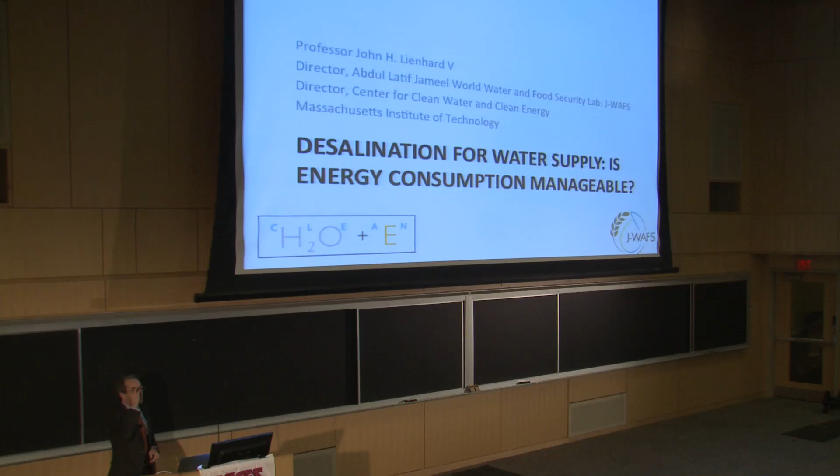I'm going to talk today about desalination, its value, its pros and cons. I'm going to focus principally on energy consumption issues in desalination. As Eric mentioned, I'm from the mechanical engineering department at MIT. Much of my work is around energy, thermodynamic analysis, and related things, and transport processes, in particular, have a great deal to do with how desalination systems function.

So I want to show a few illustrations just to get going. This is a picture I took when I was in Chile, in the Atacama Desert north of Copiapó. This is the world's driest desert. It receives an average of about 3 millimeters of rain annually. Some parts of this desert have never recorded any precipitation. And so the water that people have there, they're receiving primarily from rivers that run down from the Andes, which are about 100 kilometers inland.

The city of Copiapó had one such river. It's in a mining area, population of around 150,000 people. But the desert here is not simply an area where people are mining, particularly up in the foothills of the Andes. It's also an area where people are growing grapes for export. It turns out that if you irrigate under these conditions, you get great big grapes that can be sent to Asia and sell at sort of $1 a piece price point.

So between that and the demand for copper in China, the demand for water from these rivers has risen quite steeply. The river in Copiapó has been dry for 15 years. And as a result, they've had to look for other solutions for water supply.

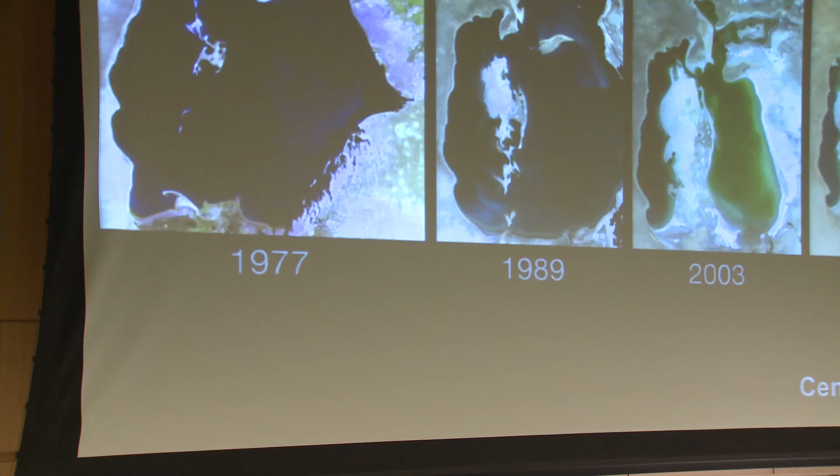This is a by now famous picture. This was the world's 4th largest freshwater lake, the Aral Sea. It is the size of Lake Erie plus Lake Ontario, to give you a sense of scale. Like those lakes, it had cities around it. It had a fishing economy. The 2 rivers that fed this lake were diverted for agriculture in Uzbekistan, and over a period of a couple of decades, the lake dried up. And as it dried up, it took the cities down with it. It eliminated the fishing economy, and the environment there has become quite hot and dusty without the moderating influence of the lake.

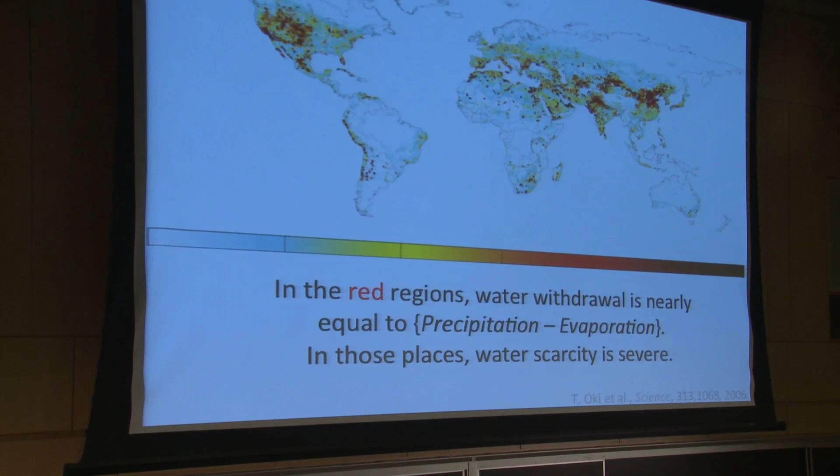And so a completely different setting, a completely different problem. This chart shows in red areas where the human withdrawal of water is essentially equal to the net precipitation over land. The significance of that number is that net precipitation over land is our renewable supply of water. That's what we get renewably. You can pump out an aquifer and drain it, but it doesn't come back unless you're taking it out only at a rate at which it can recharge. So it's very significant when we start to use as much as we're getting renewably, because it means water scarcity ensues in a significant way.

What's important about this chart, apart from the fact that water scarcity is very widespread, is that it's very contextual. You have rich countries, you have poor countries, part of a country, not part of a country. You have regions by the coast, regions inland, regions that are generally fairly arid, perhaps in the Gulf, regions like Florida which are generally pretty wet. In every case, it's a different challenge and a different set of problems.

What's driving all of this, and what's making it worse, and why there is so much concern about water scarcity, is the rapid rise in human population. We are on track to have 5 times as many people in 2050 as we had in 1927. Those additional 8 billion people have to be supplied by the same renewable source of water that we had in 1927. That's not really a dial you can turn up.

The rain falls, and so this is really the major driver behind water scarcity: human population growth. Rising standards of living affect this as well - I'll show you some numbers on that later this evening. And also, of course, the problem of climate change in the background: what is it going to do to the frequency and severity of droughts, to our ability to store rainwater if it's all falling at a single point in a heavy storm, and so on.

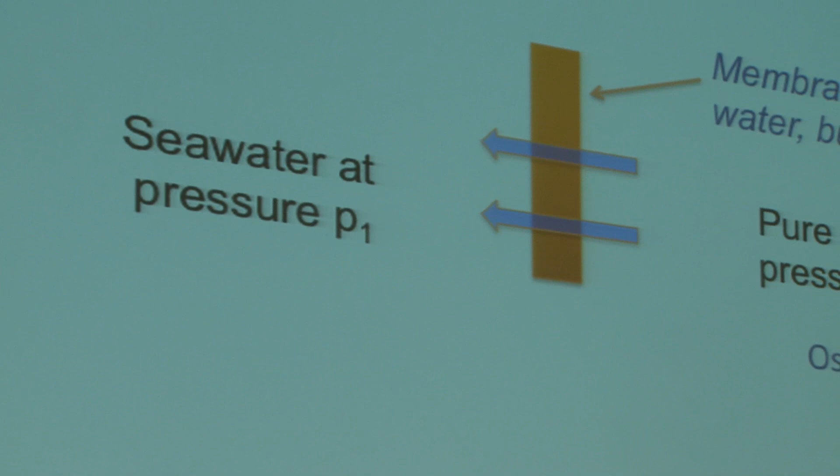So I'm going to recap some things that you've certainly seen from time to time, just to get some terminology out. I want to say what I mean by osmosis and what I mean by reverse osmosis. This picture shows in orange a membrane that water can pass through but salt cannot. You can produce a membrane like that by having appropriate charge groups on the surface. Something called Donnan exclusion will prevent ions of one charge from entering, and that in turn, for electroneutrality of the solution, prevents ions of the other charge from entering.

If you have a case where you've got saline water on one side of this membrane and pure water on the other side, only the water can be transported. There is a tendency for water to move from the pure side to the saline side in a drive toward equilibrium. So the drive toward chemical equilibrium then causes the water flow.

This tendency can be characterized by what we call osmotic pressure. There is effectively a pressure for water flow, which I'll call pi, and I'll refer to from time to time this evening. Pi, the osmotic pressure, is essentially proportional to the salinity. For seawater, the osmotic pressure is almost 30 atmospheres relative to fresh water, so you have a fairly significant driving tendency.

On the other hand, if you come back to this system and you apply a hydraulic pressure on the seawater side, you can reverse the flow and actually drive water through to the pure water side. The process of reverse osmosis is one in which you apply pressure sufficient to overcome the osmotic pressure corresponding to the water salinity - at least 30 bar in the case of seawater - and you force fresh water out of the seawater through the membrane.

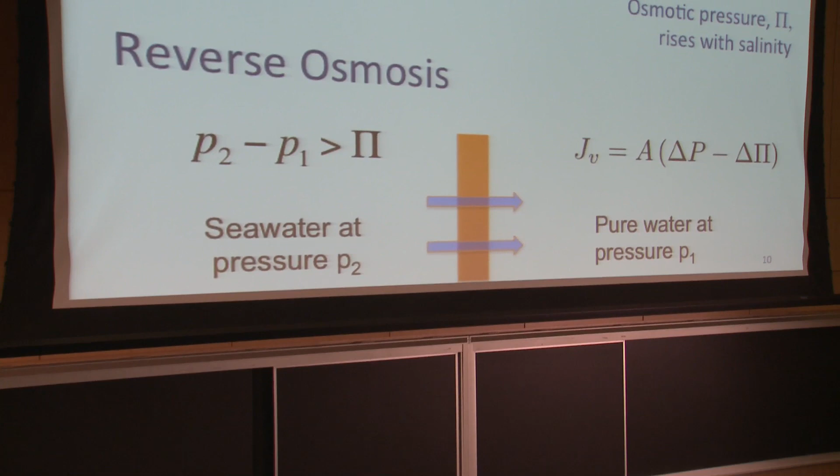The flux of water, say cubic meters per square meter of membrane area, is the difference between the hydraulic pressure and the osmotic pressure of the two streams, and the constant of proportionality is something called the permeability of the membrane, which I'll talk about a little bit here and there.

So this brings me back to Copiapó. Copiapó did not have surface water, but they did have groundwater - brackish groundwater at a salinity of about 3,000 parts per million. So Copiapó began pumping up groundwater and desalinating it by reverse osmosis. This is, in fact, one of the two plants they have.

The groundwater is brought in. There's some pre-treatment initially, then it comes to these high-pressure pumps. The pumps run at approximately 9 bar, 9 atmospheres, and the pressurized water is then taken into these pressure vessels where it's passed through membranes.

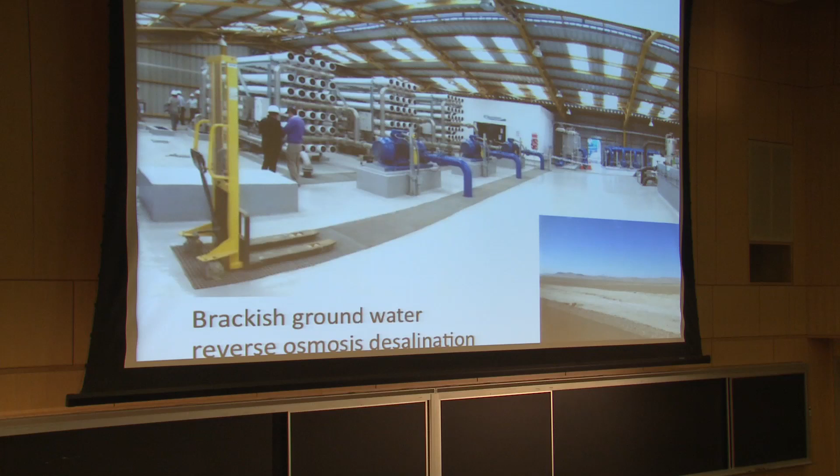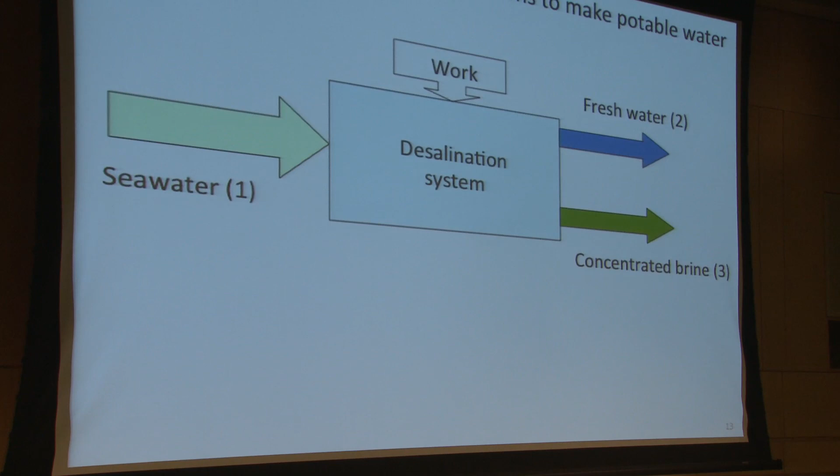Now, I said energy when I started, and I want to start by saying what the limits of energy requirements are for desalination. As a thermodynamicist, I look at that RO plant using a control volume. I look at saline water coming in one side, perhaps seawater, a stream of fresh water coming out, and then a concentrated brine. This carries all the salts that I took out of the fresh water, and in a typical case, it contains about half of the incoming water volume. The separation of these requires work in a thermodynamic sense, and that work is then provided by the desalination system to perform the separation. What is the work? The work is essentially the pumping work of the pumps that drive the water, or if you like, it's the electrical work that turns the motor.

And this work has a distinct limit. You can apply the first and second laws to that control volume. If you assume the system has no losses, the minimum energy required to recover about half the water from seawater is 1 kilowatt hour of electricity per cubic meter, per 1,000 liters of water. A cubic meter is about 265 gallons for reference. That's the best you can ever do.

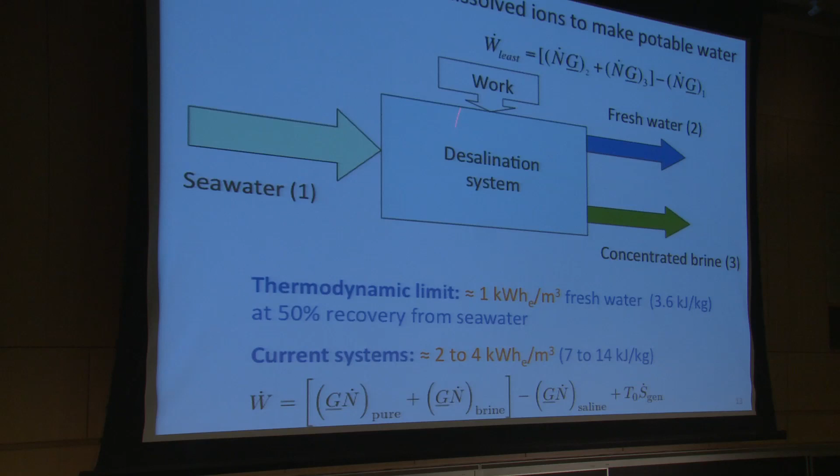Today's state-of-the-art systems are running between 2 and 4 kilowatt hours per cubic meter, and the reason they differ is because of inefficiency. Again, as a thermodynamics person, I think of the inefficiency as a source of entropy production. The system is not reversible as a result of various losses, losses in the pump, losses through the membranes, losses to hydraulic friction, and so forth. That difference is what you would like to reduce in order to drive the working system toward its thermodynamic limit of performance.

Now, every now and then, in fact quite frequently, maybe once a year, somebody will invent a new membrane or a new process. They'll get very excited and make a statement like this: the new membrane is going to reduce the energy requirement by a factor of 100. Well, from what I've just shown you, the current state of the art is within a factor of 2 or 3 of the best you'll ever do. So you know, without evaluating the claim, that it's incorrect. What's happened is that somebody has looked at a membrane with 100 times the permeability, and presumed that means 100 times less energy. But the systems are a little more subtle than that.

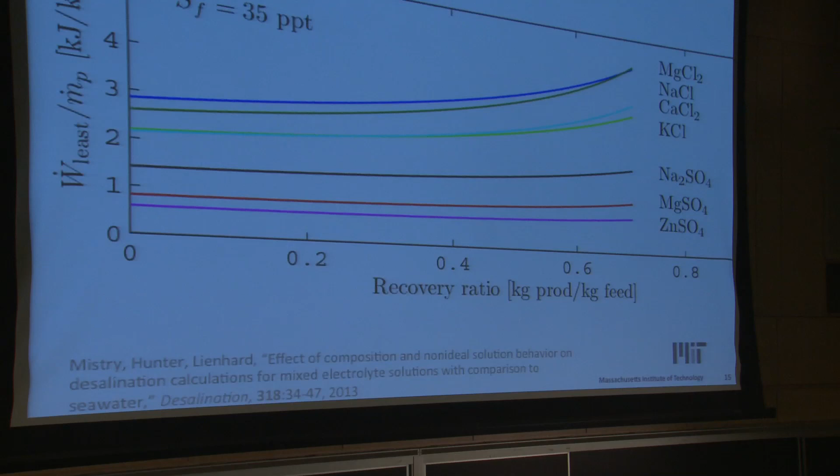Now, the numbers I showed you for the minimum work requirements were for saline water with the composition of seawater and its total dissolved salts. If I used a different composition, say zinc sulfate at the same mass concentration instead of mostly sodium chloride as in seawater, I would need much less energy. At a glance that may seem obvious, but it's very important as you start to think about the variety of waters you might want to desalinate.

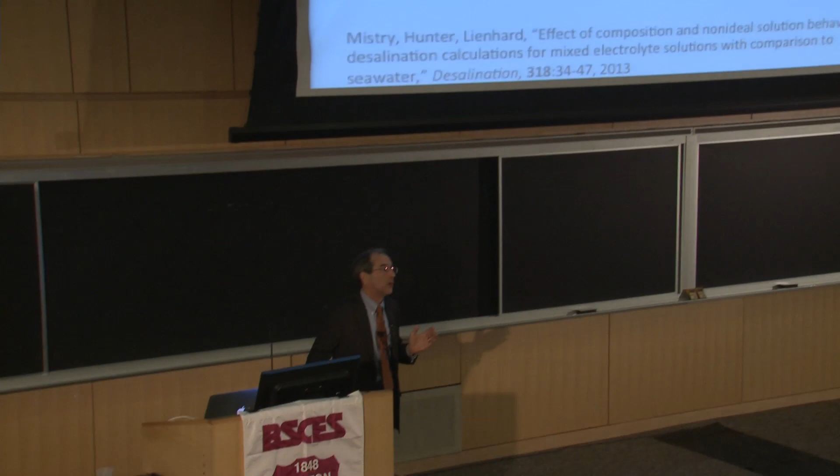It turns out that seawater around the world has more or less the same proportions of dissolved ions. It can be saltier or less salty depending on rates of evaporation and freshwater inflow from land, but in general you have about 80% sodium chloride and similar proportions of calcium, sulfate, carbonate, and some other common ions. If you're dealing with groundwater, the compositions and proportions are different, so you have to be careful in just assuming it's diluted seawater.

If you're dealing with water from various industrial processes, perhaps from oil and gas production, you again have very different compositions. I want to mention this topic in particular because there's been so much attention and concern about shale gas production, unconventional oil and gas, and in particular the water used in that process. Both the water that gets pumped in and received back for hydraulic fracturing, but also the water that's steadily produced by these wells over a period of years. The so-called flowback water comes to the surface within a month or two of the fracking operation, and you get perhaps a third of what you put down back.

As the well continues to run, water continues to come up with the oil or gas. That water has been underground for a very long time. It's come to chemical equilibrium, more or less, with whatever rock formation it was pulled from, and so it reflects the composition of the rocks it's been sitting in. It's also generally at very high salinity.

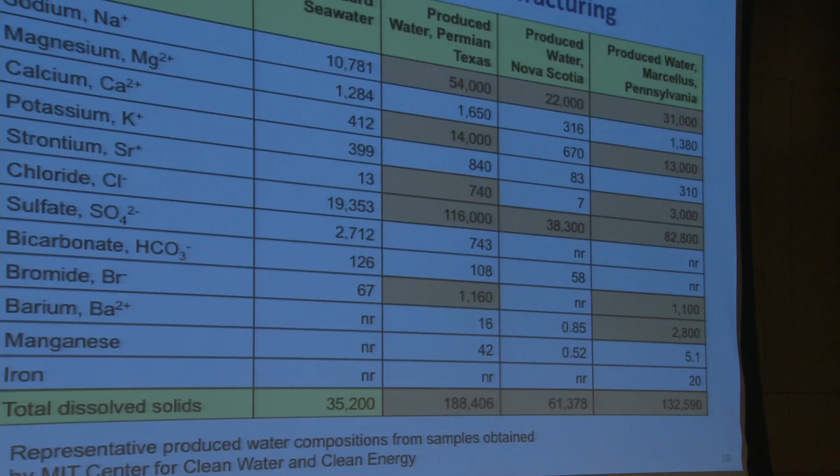These are some typical samples. This is the composition of standard seawater at about 35,000 parts salt per million. You can see the dominant ions in seawater are things like sodium, chloride, calcium, and so forth. If I look at produced water, a typical sample from the Permian Basin in Texas, you'll notice the proportions are different—you have things like strontium and barium at relatively high concentrations.

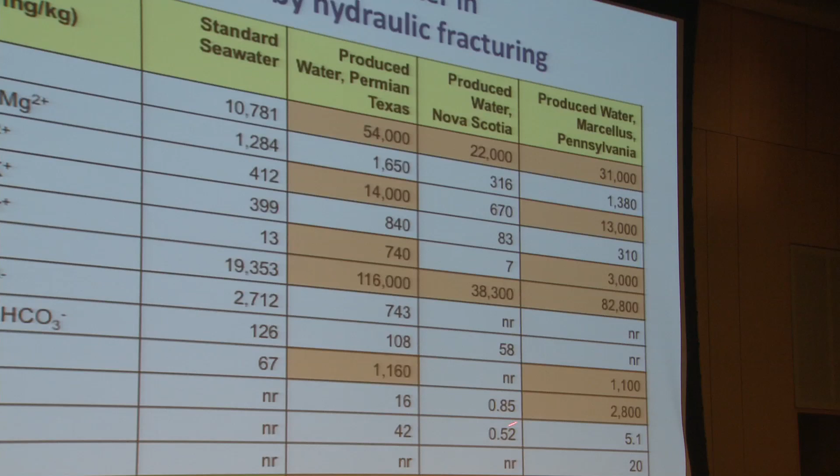You'll notice that the total salinity of this water is about 6 times that of seawater—much saltier water. If I look at similar water from fracking in Nova Scotia, it's only twice the salinity of seawater, and it's mostly sodium chloride—maybe not surprising given where you're located. And if I go to the Marcellus shales in Pennsylvania, I get another salinity. Again, I might see a lot of barium in the water, perhaps a lot of strontium. These variations in composition are quite important if you start thinking about desalinating that water and cleaning it up.

What are you going to do about it? For example, if I go to these calculations I showed you before of the least work of separation for such water, the curve on the bottom for about 3.5% sodium chloride is very similar to the seawater curve. You can see that as the percentage of water I recover goes up, the amount of work required goes up. Typically for seawater reverse osmosis, you're going to stop at about 50% recovery.

But what's more interesting here is that when I go to these other formations and look at produced water—Permian Basin in Texas—for that water, you're looking at a least work that's almost 8 times as much as the work required to desalinate seawater. So the composition right away sets a baseline that says you've got some challenges.

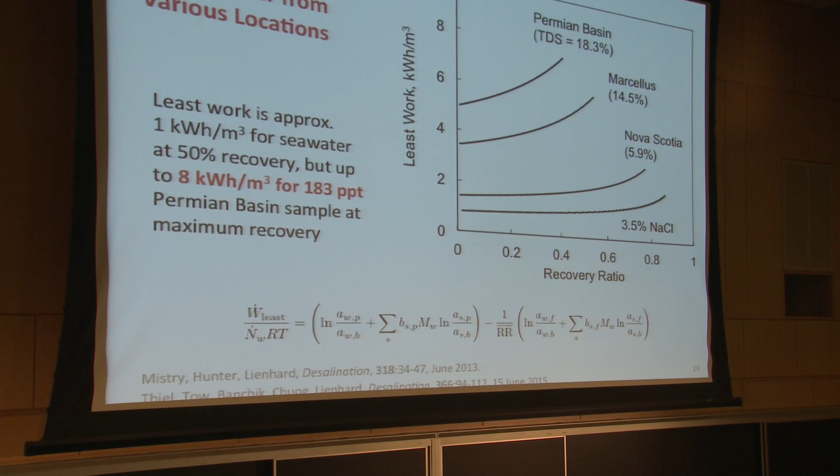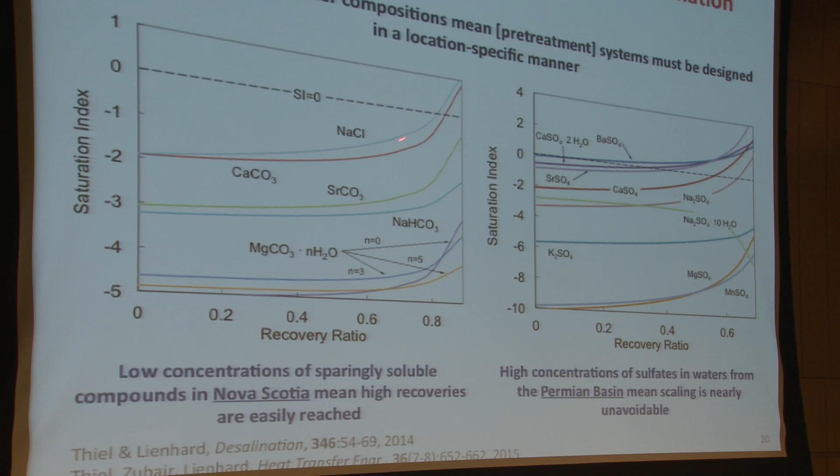You have some other challenges as well, because as you start to remove water from seawater, from produced water, from any of these things, you'll hit a point at which you reach the solubility limits for one ion or another. For the waters from Nova Scotia, you don't have a lot of stuff that's insoluble. In fact, the first thing that really starts to precipitate is sodium chloride, which is often actually relatively easy to clean out of your equipment if you do have fouling.

On the other hand, if you look at the water from Texas, almost immediately you're coming out near saturation with barite. You've got strontium sulfate as well, you've got calcium sulfate—these things are coming out right away. What that tells you is that before you can even think about desalinating that water, you've got to do some type of pretreatment to get rid of the strontium, get rid of the barium, remove the sulfates. It's typically done by chemical softening of some sort, and then you can go on and desalinate whatever remains.

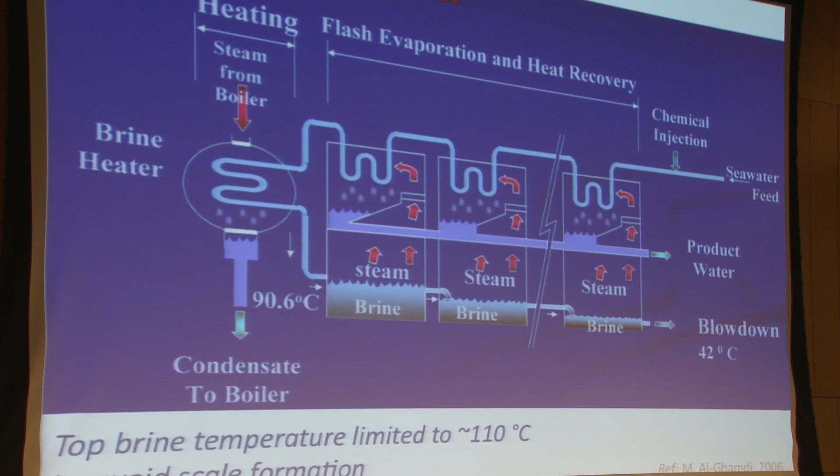I mentioned membrane processes. I want to say some things about thermal processes. Distillation is, after all, the oldest of the desalination technologies—it goes back to antiquity. A modern distillation plant is much more thermally efficient than simply boiling water and condensing the vapor would be, because when you boil water and condense the vapor, you're giving up all of the energy you used to vaporize that water in the condensation step. Water requires something like 2.2 megajoules per kilogram per liter of water to vaporize—a lot of energy when you're doing it at large scale.

So a well-designed thermal desalination process will attempt to capture the latent heat as vapor is condensed and reuse that energy to vaporize more water. When a system is designed well, the amount of energy you put in is about 1/10 the amount of energy it would have taken to boil and condense that water. We call that ratio the gained output ratio, and a design goal is to make the gained output ratio large.

Now in this case, you've got seawater coming in. It's cold, acting as a coolant in a condenser, condensing some vapor. It's doing this through multiple stages, perhaps 20 or 30 of them, and finally it will leave the condensation path at a temperature of perhaps 70 degrees C. You'll top heat it with steam from an adjacent power plant, and then it will come back at 90 C, and you'll start to depressurize it.

You'll drop the pressure in each stage 5 to 10 kPa, and every time you do that, you vaporize a few percent of the seawater. This vapor is formed by going through each of these stages. The depressurization is accomplished by pulling a vacuum at this end and then having a series of weirs, a hydraulic resistance stage to stage that allows you to get the pressure drop.

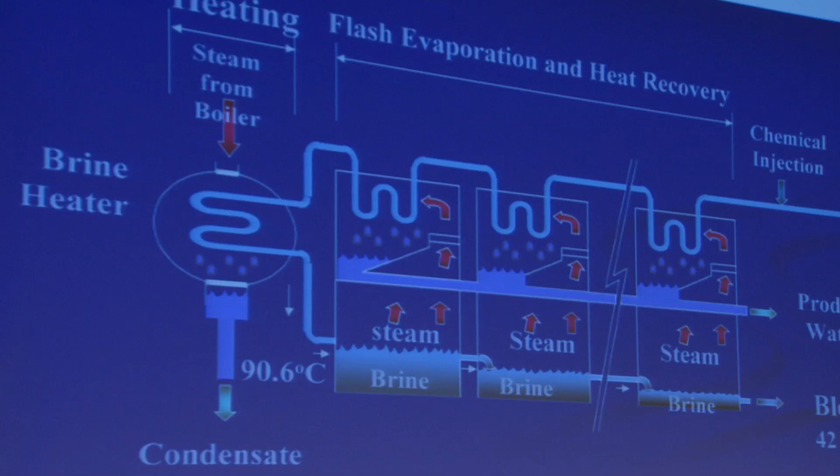The vapor that's formed here condenses and comes out as product water. The whole thing from a thermal engineering perspective is a regenerator, a recuperator. You're recovering the heat you put in to the greatest extent possible, and then you're getting the purified water on the outlet.

These systems would operate all the more efficiently if they had a really high temperature on the top side. But you're limited on the high end by scale formation. Above 100 or 110 C, you very rapidly begin to precipitate calcium sulfate, which forms hard scale in your equipment. It's not economical to control or remove, so people just don't run beyond that.

If you could find a way to do it that was economic, you could make these systems much more efficient. You could probably make a lot of money.

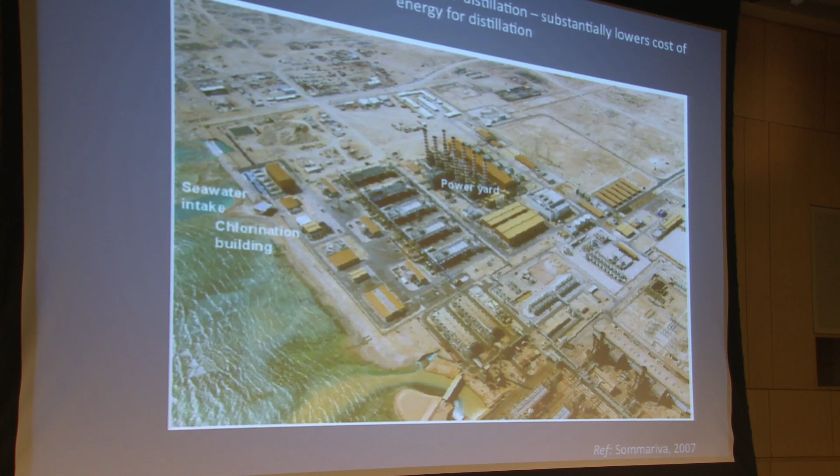Water is taken into the power plant. It's used as coolant in the condensers. Some of it is also used in the flashing process. Depending on how this system is designed, the water that leaves the plant, the brine leaving, might be blended with some of the coolant from the condensers to dilute it before it hits the ocean.

Systems like this also have a limited performance. To think about that, I simply think about heat at a high temperature going to a low temperature. Remember something called the Carnot cycle from thermodynamics? The amount of work you can produce from a Carnot cycle is related to the amount of heat transferred and the temperature differences. A straightforward calculation will tell you the least amount of heat required to desalinate.

Now here I want to be very careful. Heat and work are not the same so far as a thermodynamicist is concerned. For example, to make work, to make electrical power, you use a lot of heat. But you can only convert about half of that heat into electrical power. The rest has to be dumped under the principles of the second law. And so you don't want to add heat to work.

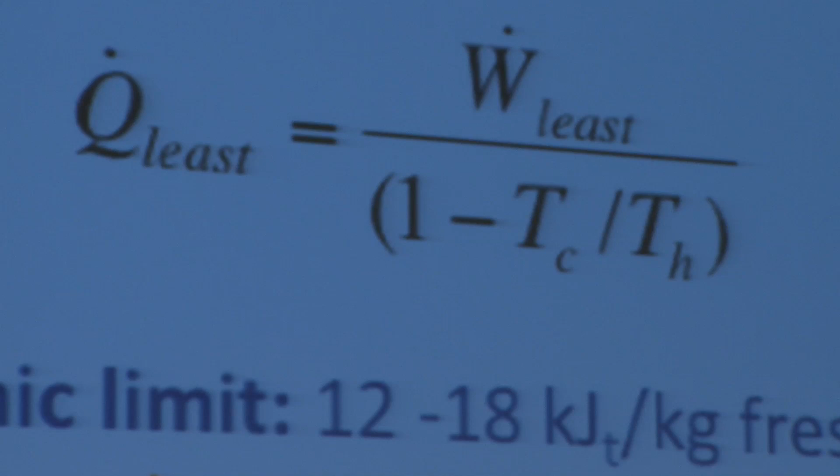I'm going to give you the performance here in units different than I used before. These are kilojoules. The thermodynamic limit of performance is about 15 kilojoules per kilogram of water produced. Now, a real system, such as the one I showed you in the picture before, requires about 20 times that much thermal energy. It's a long way from the reversible case, very long way.

There are a number of reasons for this. One is that the top temperature tends to be very low. Another is that to get reversible performance, or anything like it, I would need very large heat transfer surfaces. That means very large condensers with very large amounts of expensive copper-nickel alloy piping. It would not be economical to build this system strictly for energetic performance.

Like all desalination systems, these things are designed to optimize the cost of water as opposed to the energy consumption. And the capex for a system like this can get to be quite high.

Now, what I can do to make a comparison to the mechanical system is I could say, well, I got this heat at a certain temperature. I could have left it in the power plant. I could have generated more electricity with another turbine, a condensing turbine. How much electricity could I have made? Well, I could have made something like, say, 14 kilowatt hours of electricity. That's still a lot more than the state of the art for the reverse osmosis systems.

On top of that, the system that I showed you back here is circulating enormous amounts of water. The electrical work to pump that water is typically 3 to 4 kilowatt hours of electricity all by itself, just for the pumps, which is to say it's already just as much as the reverse osmosis process.

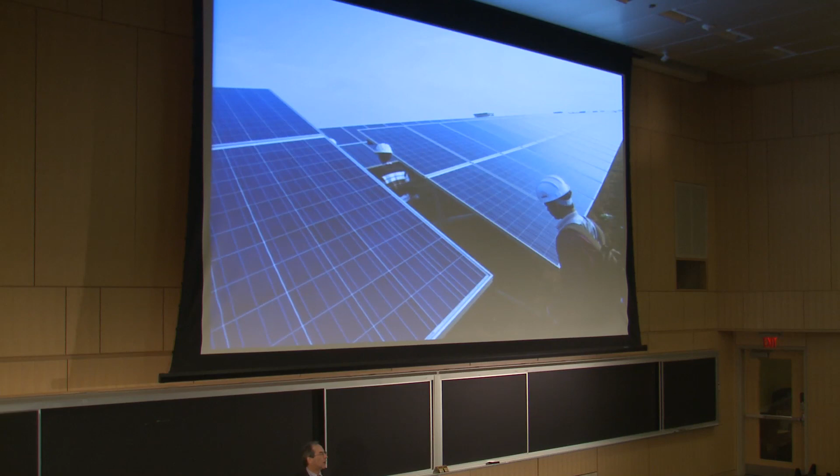For that reason, most interest in solar-driven desalination is based on photovoltaics, which directly produce electrical work from solar energy, and which have become cheaper and cheaper as production volumes have come up. So almost any time you see somebody trying to do solar-driven desalination, off-grid desalination, the driving energy source is going to be a solar panel, and that's really very much the direction things have gone.

Groundwater, of course, is the other place we might look at desalination. There's a lot of water around that is brackish, for one reason or another.

So people are interested in the question of whether they can pump some of that up and desalinate it and use it for irrigation or even for drinking or for some other purpose. You, of course, also have to ask yourself whether it's recharging at adequate rates. There are a bunch of hydrological questions that go with the use of that resource. But nonetheless, this becomes very interesting in particular contexts.

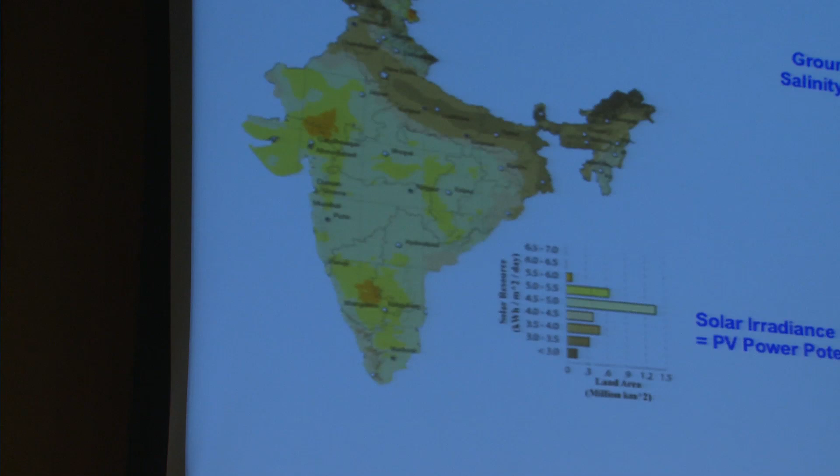Amos and Natasha observed that these regions that have very brackish groundwater also tend to have fairly high solar availability, so a lot of solar incidence. If you've been to Gujarat, it is very dry and very sunny, for example. So their idea is to use solar panels, electrical panels, and a process called electrodialysis to separate ions from brackish groundwater. Electrodialysis has been around a long time.

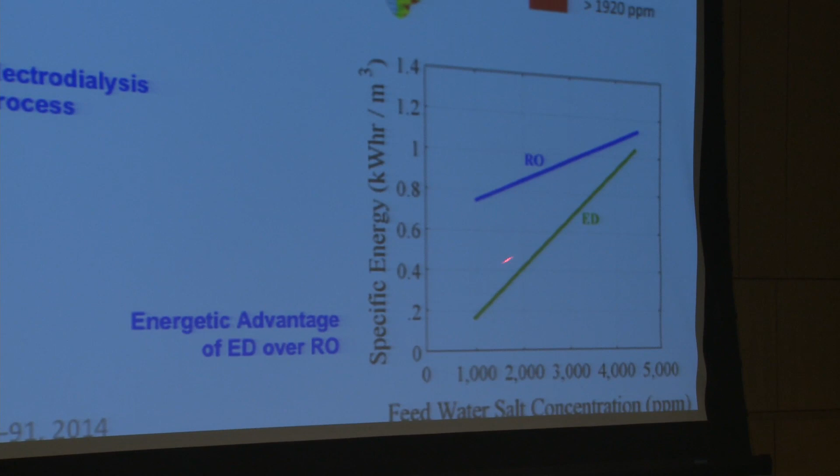It happens that there is a sweet spot for this technology relative to reverse osmosis. The energy required to desalinate by electrodialysis is less than reverse osmosis by a significant amount within a window of 1,000 to about 3,000 ppm, again depending on some design variables. So they're interested in coupling solar panels with ED to go into India and address some of these challenges.

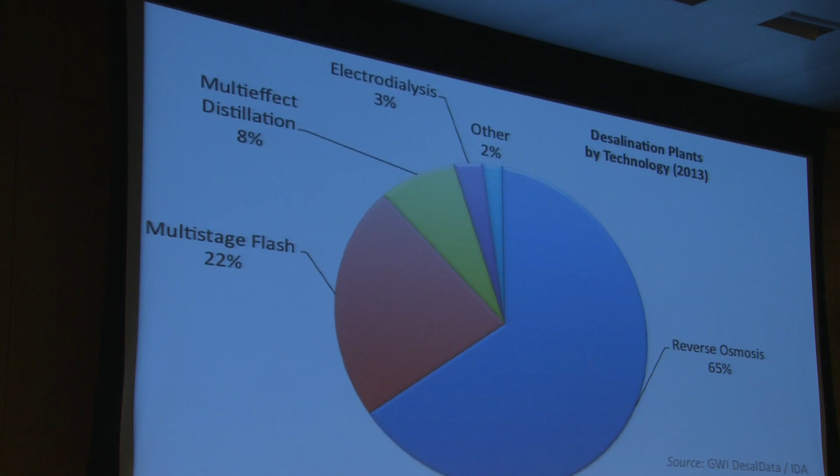So I've given you a range of technologies at this point. This is a map or a pie chart from 2013, data from the Desal database. What you see is that worldwide, most of the installed capacity, about 65%, is reverse osmosis. You have fairly large installations of the flash process I showed you, a related process called multi-effect distillation, just a very little of electrodialysis, and then some other technologies. A total of, actually today, close to 90 million cubic meters per day of water are produced by this means.

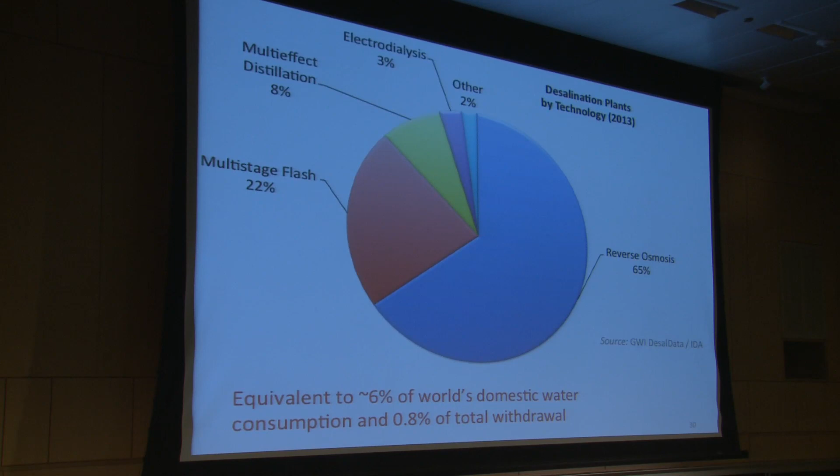As it happens, that's equivalent to about 6% of the world's domestic water consumption. It's not all used that way. Some of it's used for power plants. For example, in Gujarat, the world's largest oil refinery has a distillation plant that provides all of its water.

If you look at the total water withdrawal in the world, it's on the order of 1% and continuing to grow. Now, about 50% of seawater desalination is done with these thermal technologies, which aren't very efficient. You might ask why people are using these. Well, they're great big plants with very long lifetimes and large capital investment. You can retube one of these things and keep running. These plants went online many years ago and will stay online for some time to come. But there are relatively few thermal plants being built now, and even in countries with a lot of thermal plants, typically the Arabian Gulf states, they're building more reverse osmosis plants. That's really the direction things are headed.

The largest installed capacities are in Saudi Arabia, Kuwait, and the United Arab Emirates. As it happens, the United States has a great deal of desalination too, but we're also a very big country so you just don't notice it—it's not a huge fraction of our production. The Spanish have gone heavily that way, the Chinese are moving that way, and of course the Israelis are getting most of their water at this point that way.

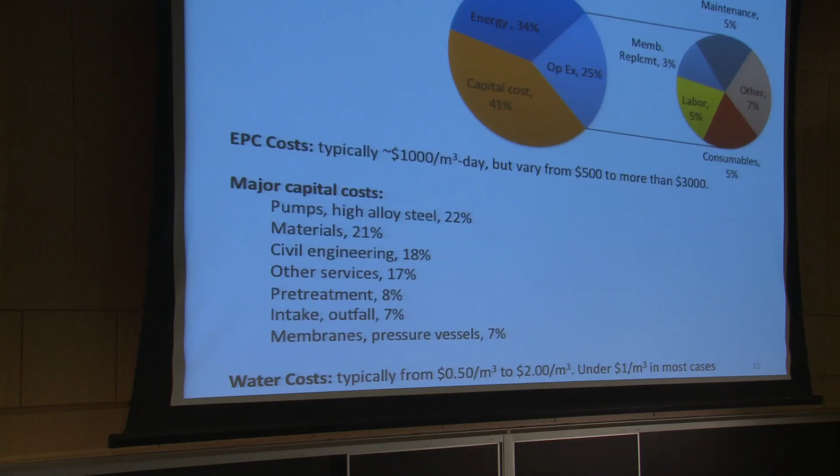You might be wondering what this all costs. Cost is always a big concern around desalination, so I'm giving you some breakdowns here. The pie chart shows the cost of water, roughly dollars per cubic meter. About a third of the cost of water from reverse osmosis is energy, the electricity. About 40% comes from CapEx, and the balance is OpEx divided amongst the categories you can see here.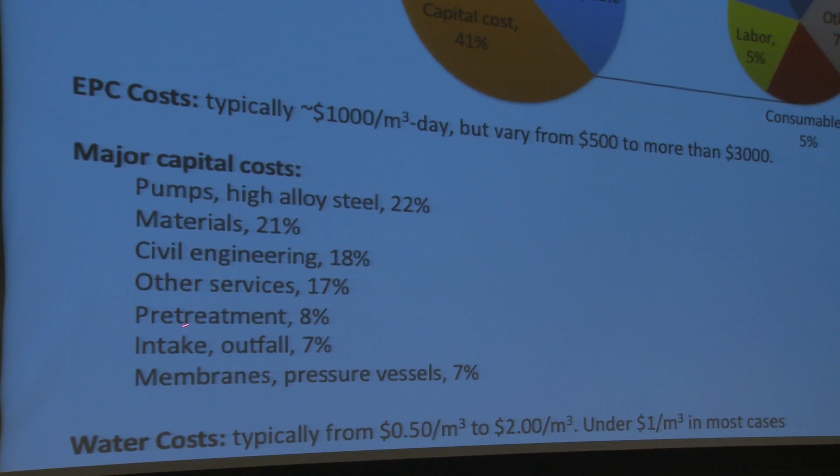If you ask what the EPC cost is—the engineering and construction cost—these are the major drivers. High alloy steel and pumps are almost a quarter of the cost of a typical plant. Other materials, engineering services, legal and other services follow. Finally, pretreatment, intake and outfall for the plant. Surprisingly, down near the bottom are the membranes and pressure vessels. For all the attention given to membranes, they're actually not the most costly part of the plant by a good stretch. This tells you that as you think about engineering these plants to cut cost, you're probably more interested in reducing the amount of high alloy steel or the number of high pressure pumps, as opposed to improving the membranes.

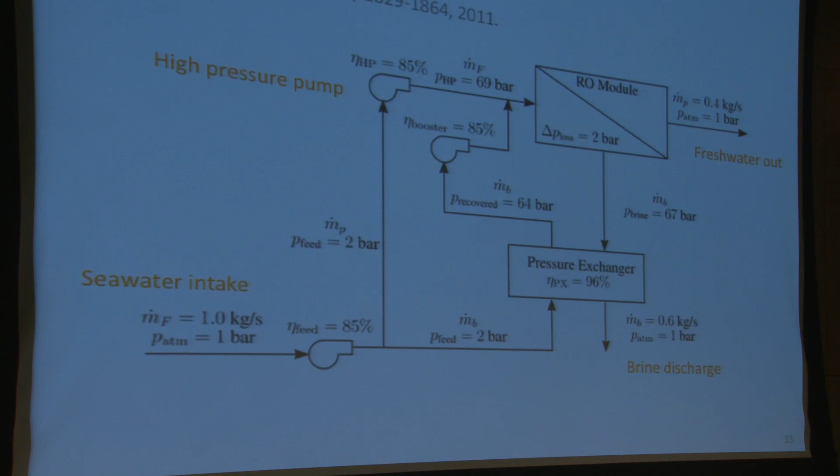So what governs the efficiency? This is a representative flow path of a reverse osmosis plant. The membranes are in this box here, so high pressure seawater enters, goes through the membranes, and comes out as low pressure purified water. High pressure brine leaves over here—it doesn't lose a lot of pressure, maybe a couple of bar against perhaps 70 bar as it goes through the membrane.

So there's a lot of energy in the brine leaving—it might be 60% of the flow. That energy is recovered through something you can think of as a turbocharger pump. The actual devices, the pressure exchangers, are rotary machines—really very clever engineering. They're very efficient at transferring this pressure to some of the feed. The rest of the feed is taken through a high pressure pump and brought in here.

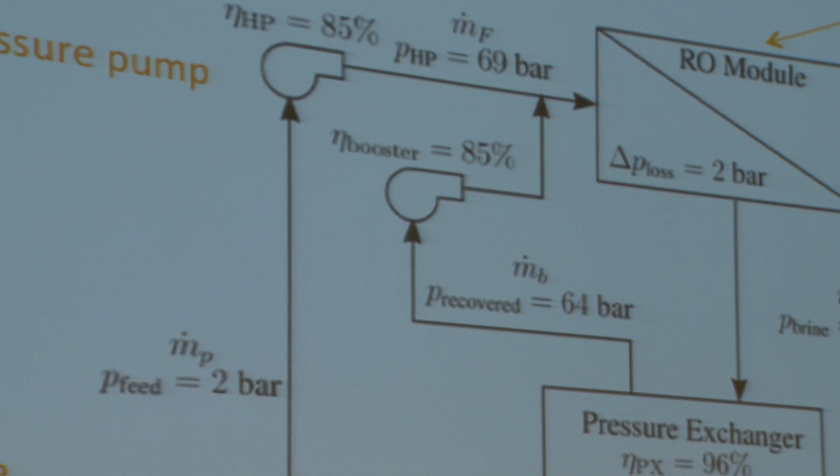So you can ask, what is the biggest source of loss here? The pumps are actually pretty efficient—in fact, for the largest plant, this high pressure pump has an efficiency in the range of 85%. These are really efficient pumps for reasons that are clear. Most of the losses occur as the water goes through the membranes. You get a very large pressure drop here, and you can't do a lot to recover it under current designs. This loss, the so-called irreversibility, is what I call entropy production.

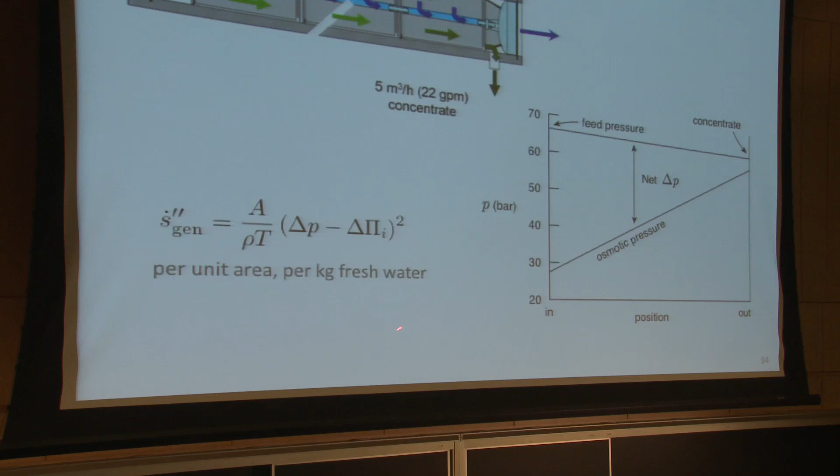Now, what's going on? As the water travels through here, it enters with an osmotic pressure that might be 25 to 28 bar, depending on the salinity. By the time you get out, you've doubled the osmotic pressure of the brine. In order for water to flow through the membranes down at this end, the hydraulic pressure down here needs to be greater than the osmotic pressure there.

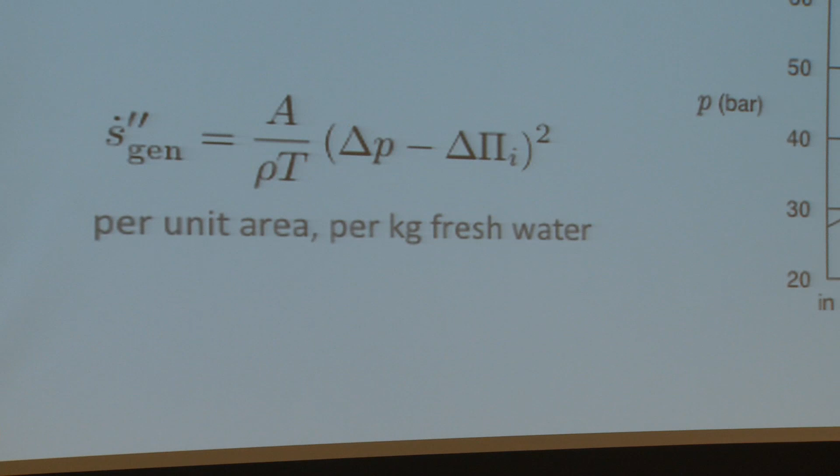You've got to set some higher pressure down here, and the only way to do that is to set a really high pressure at the inlet. So much of this device is greatly overpressured relative to what it ought to be if you just wanted the water to flow gently through. It's a calculation, but you can find that the difference between these two squared is essentially the size of the entropy generation. So your engineers, what do you do about this?

Well, one thing you might consider is pressurizing to 40 bar and letting the pressure drop, then pumping and pressurizing again, right? You will cut down on the overpressurization, and that will clearly lower the entropy generation. But it will raise your CapEx. And these are large, expensive pumps, so it's hard to do that economically.

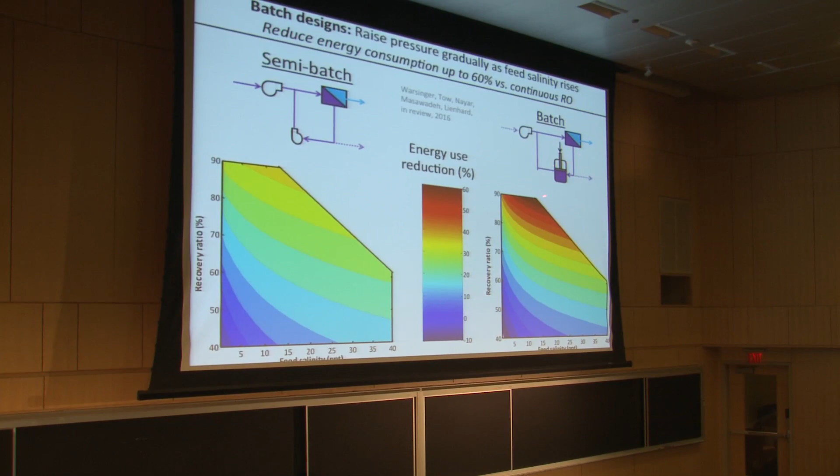You really need to look at processes that work a little differently. Here's an example. Suppose that I run in batch: I charge up this cylinder and then gradually pressurize it as water flows out through the membrane here, keeping the pressurization just above the osmotic pressure as the process runs. So I'm never overpressurized, with the result that I can cut energy consumption quite dramatically, perhaps by as much as 60% relative to the process I just showed you.

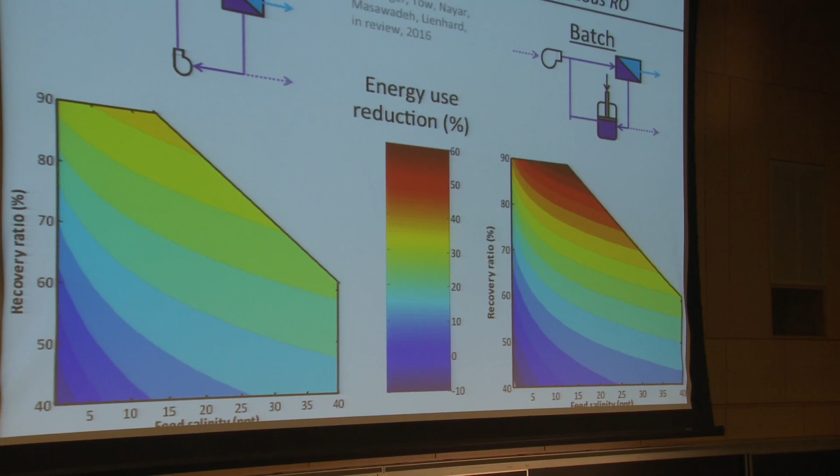There are some commercial variants. There's one on the market that resembles this process - in fact, it's a local startup called Desalitech, based on some technology that came from Israel. This variation, however, is even more efficient, as you can see from comparing these two charts. This one was just patented by our group at MIT.

Now, in thermal systems, you have similar things you're trying to do - you're trying to limit temperature differences that cause entropy generation. It turns out that the rate at which you produce entropy depends more or less on the difference between the two temperatures through which heat is transferred. So if I have a heat exchanger, hot fluid this way, cold fluid this way, similar to what I showed you in the thermal desalination plant, when one stream has a much higher product of mass flow rate and specific heat capacity than the other, you get a variation in the difference between the streams' temperatures.

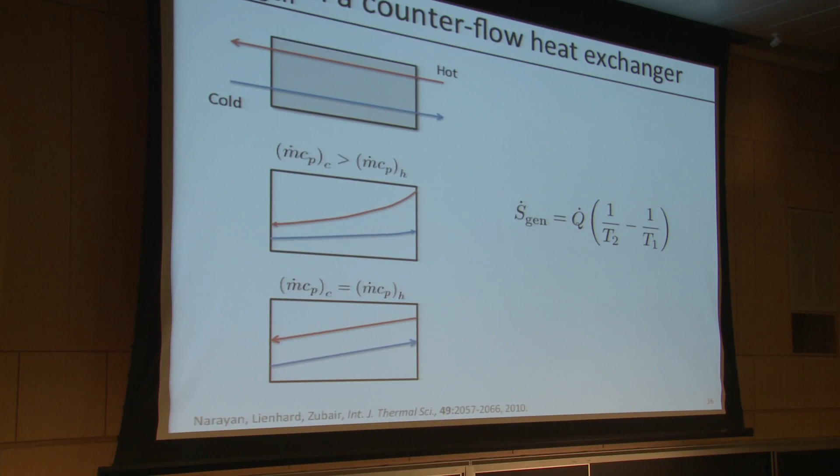In this case, the hot stream has a lower heat capacity rate, so its temperature changes a lot, while the cold stream doesn't change much. That means I'm generating a lot more entropy on this side of the device than on this side. On the other hand, if you balance the capacity rates, the entropy generation can be minimized. It's not a difficult calculation to show that minimum entropy generation in a heat exchanger occurs when the ratio of capacity rates is 1.

If you think about something like a membrane process in counterflow, there you're not thinking about heat, you're thinking about differences in concentration or chemical potential. The entropy generation process is very similar - the same ideas about balancing apply. Or if you think about a humidifier, maybe you want to do a humidification-desalination process, you have the same kinds of ideas.

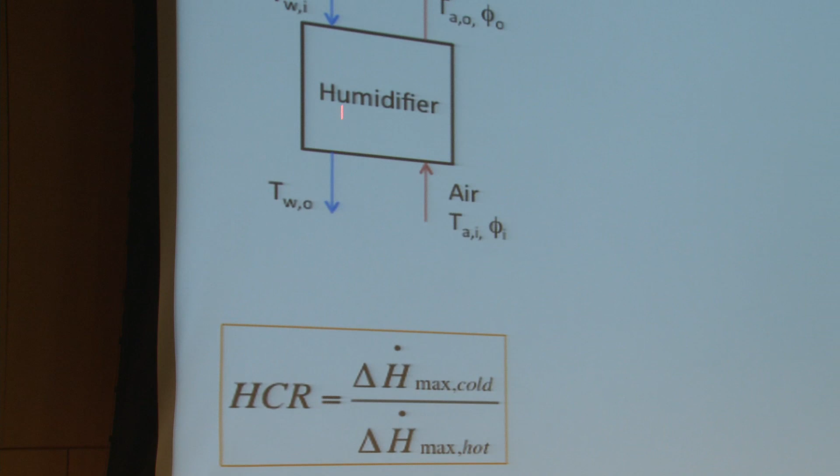In this case, think of this as a cooling tower or packed bed. You've got warm water entering the top, cold dry air entering the bottom, and a splash packing inside. Water vaporizes into the air, and the airstream now leaves warmer and more humid. In this case, you're putting latent heat into the air, not just sensible heat, so it's insufficient to think about a heat capacity rate.

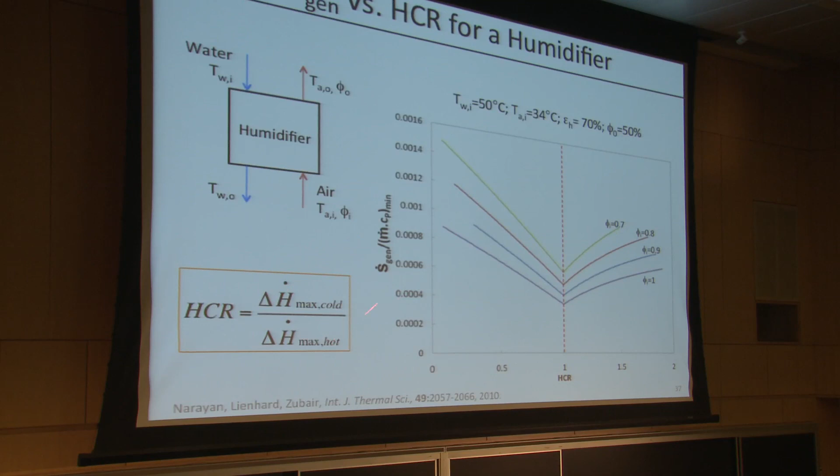Instead, what you should think about is just a change in the enthalpy flow rates - you get a modified heat capacity rate ratio. But if you control that parameter in much the same way, entropy generation is minimized when this modified heat capacity ratio is unity.

How do I use these ideas? Here's an example of a technology we've worked on at MIT quite a bit - it's called humidification-dehumidification desalination. In this system, you bring saline water in, perhaps seawater, groundwater, or water from hydraulic fracturing, use it as a coolant in a condenser similar to what I showed you before, then heat it, and spray it over a splash packing. Then you've got air flowing through here.

Air flows through here in opposition. The air comes through, it's humidified, you take it over here and condense purified water. You can recirculate this brine as many times as you need to get a decent recovery ratio.

This is pretty neat for the following reason: there's no membrane. Membranes are sensitive, they require pretreatment, they require the pH to be managed, and they don't like scale. Everything in here can be cleaned with a wire brush. You've got standard unit ops, things you already know how to do. You don't need a new material, it's all basically off the shelf.

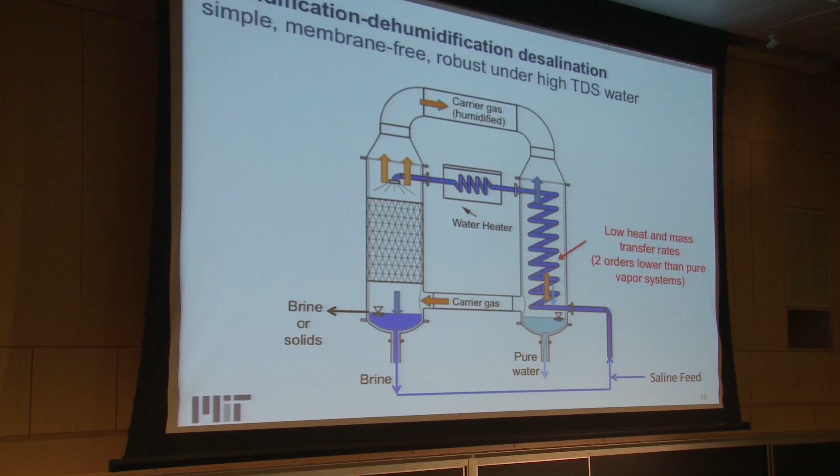You do have a problem: in this dehumidifier, you have air and water vapor. When you think about a condensation process, you're bringing water vapor to a condenser surface. It condenses as a liquid and rolls down the surface. If air is in the condenser, it gets swept to the condenser surface but doesn't condense, and so air collects near the condenser. That's why you don't want air on a vapor condenser.

This incondensable gas problem cuts the heat and mass transfer rates by about two orders of magnitude, and it's really a challenge. That's why your household dehumidifier has these great big aluminum plates in it - you put in a lot more surface area to overcome the resistance to heat and mass transfer. The effective resistance is 1 over the area, so a big area is the solution.

However, another way to do this is to use a direct contact process. This is something we worked on at MIT. You bring warm, moist air into a pool of cold water. You form a bunch of bubbles. The water vapor condenses on the bubble surface, and the air flows on out, having been cooled and dried.

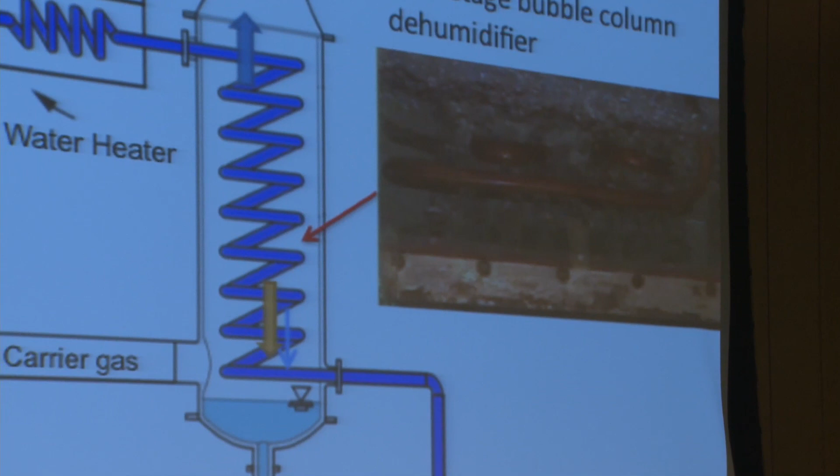The interesting thing is these bubbles are constantly reforming, so there's no way for incondensable gas to collect at the bubble surface. You've eliminated the incondensable gas problem and you've got a very high rate of transport. These systems are violently stirred, and you've got a device that's effectively much more compact and cheaper than what you started with.

So this is a pretty interesting concept - a bubble column dehumidifier here, a splash packing here. You still have the design problem that the mass flow rates in these two devices are coupled: whatever goes into one goes out the other. The temperatures in the two devices are coupled too. You can't just design the humidifier and then stick it onto a separately designed dehumidifier - you have to design them in tandem, and this is all done with software.

You've also got a very strong nonlinearity in this system because vapor pressure rises exponentially with temperature. As the temperature of the system goes up, the vapor pressure goes up dramatically. A device like this is critically sensitive to the top and bottom temperature you're working with. Nevertheless, it has a similar heat capacity rate ratio to what I showed you for a humidifier, and for a counterflow heat exchanger. If you design this so the heat capacity rate ratio is 1, you can maximize the energetic performance of the device. It's a very simple device.

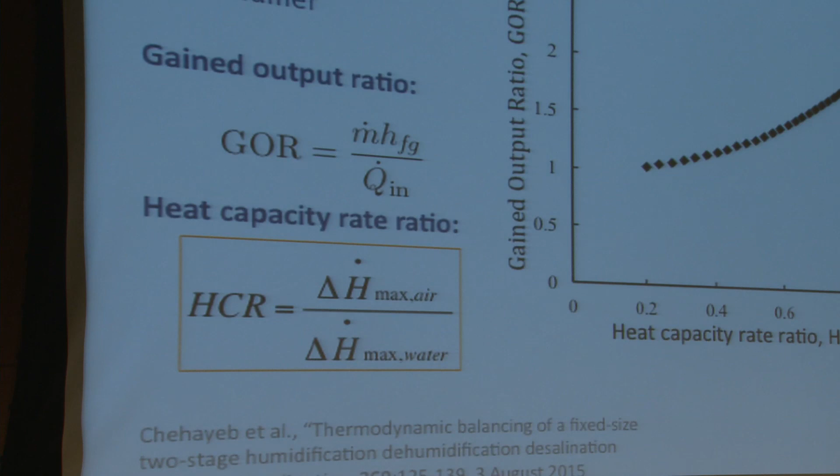There are ways to do this that are more efficient. But the gained output ratio - the energy you put in relative to what you'd have had to put in to just vaporize and condense - is vastly improved by this kind of design.

I want to say a little more about these bubble columns. This is what a single stage device would look like. You've got seawater coming in through a coil here, and moist air coming in through the bubbles. They both come toward the temperature of whatever liquid's in the column - that's the set point in this device. Now, you can see I've lost an awful lot of driving potential in this process. I didn't have the opportunity to do something more efficient with just one stage. As a result, my seawater didn't get very warm.

On the other hand, if I use a series of these trays and go through a series of different temperatures, I can bring the seawater up bit by bit through each of several stages. As a result, instead of having a device that's 30% efficient, I have a device that's 92% efficient. I can do that in about 3 stages.

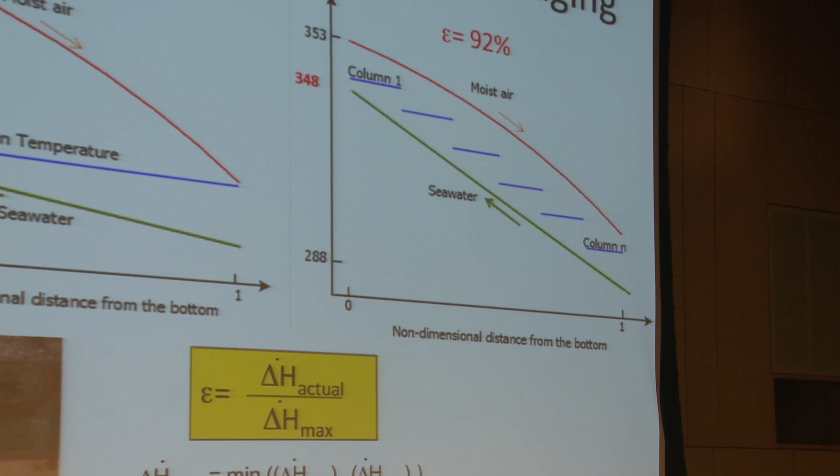My former students took this out and commercialized it. They're currently working in West Texas to remediate water from unconventional oil and gas. They're doing well, except for one little detail - the price of oil has fallen dramatically since they went into business.

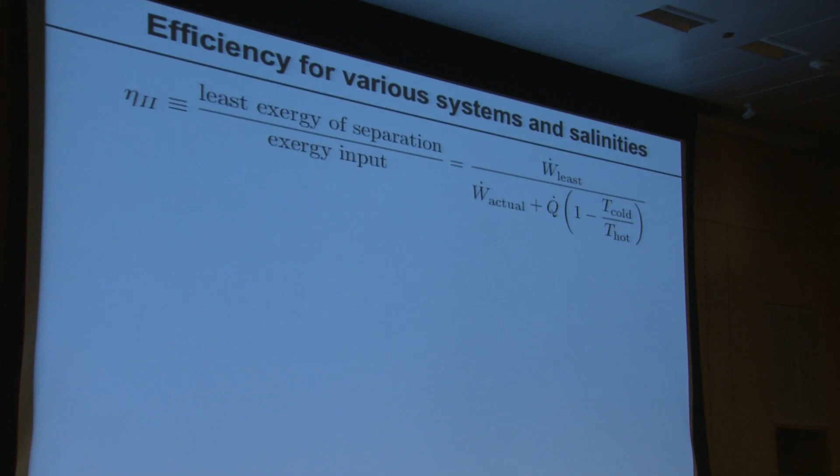So where does this leave us in terms of the overall efficiency of various types of desalination process? When I think about efficiency, I think about what we call second law efficiency. I think about the minimum amount of work, or the least exergy, that I would have to put into the system to get something done.

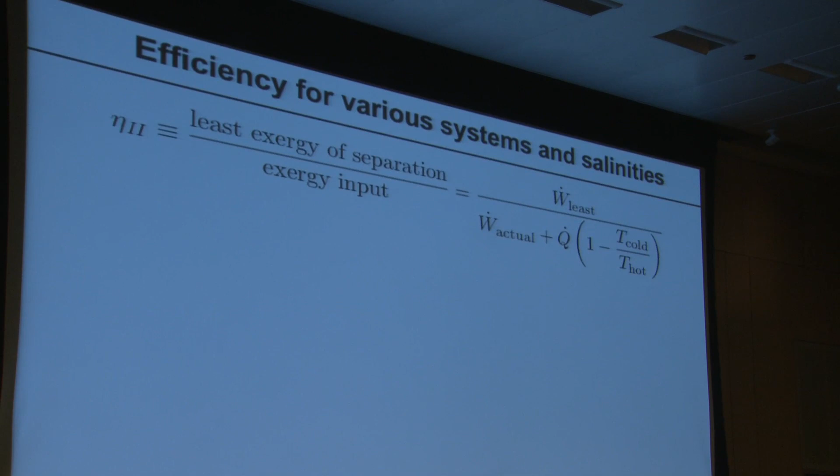For example, the minimum work of desalination, the minimum work to pressurize. It's like an isentropic efficiency for a pump. And I think about that relative to the amount of exergy I actually had to add. So this would be the least work of separation divided by the actual work that went into the RO pumps. Or it would be the least work of separation divided by the Carnot factor on the heat I put into the thermal desalination plant, plus the work I had to put into the pumps circulating all that water. This is a proper measure of how well I'm using the energy relative to the best process I could have.

Here's where a bunch of common systems stack up in terms of the least work of separation and the exergetic efficiency. These are the thermal plants I showed you, typical MSF plants. These are real data from systems described in literature. You can see their overall thermal efficiency is in the range of 5 to 10%. Not great, not really that great.

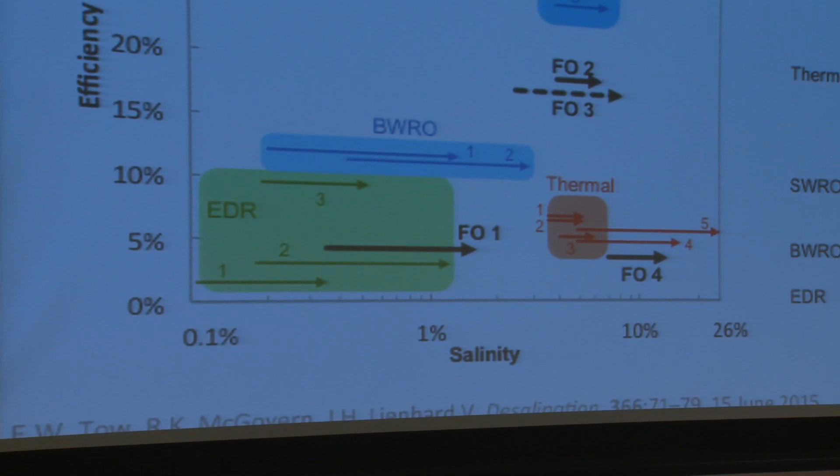If you look at the seawater reverse osmosis plants I mentioned, working plants, numbers tend to be more like 25–30% overall efficiency. It's a vast difference in the efficiency with which energy is being applied between these.

Now again, in both cases, those plants are not designed to impress you with energy efficiency. They're designed to minimize the cost of water to you. I could make the seawater RO plant more efficient by having larger membrane areas, more pumps, lower flux, etc. I could make the thermal plant more efficient by having bigger heat exchangers and more copper. But this is representative of where the state-of-the-art sits now.

There's some other technologies here. The so-called forward osmosis process you may have heard of lands in between. Again, there are a number of designs, and depending how it's designed, it's somewhere in this space.

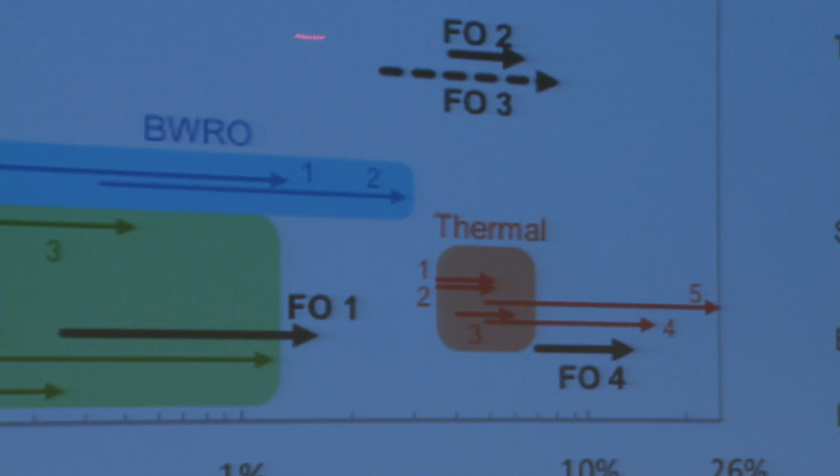Over here we have brackish water reverse osmosis, typical plants. You'll notice the efficiency for the brackish plants is lower than the seawater plants. You probably wonder why. Well, there are two things. The brackish plants tend to be smaller in most cases. Typically, when they design these plants, they're looking at cost of water, and they find they can get a more economical design by having fewer membranes, not having the pressure recovery device I mentioned, and simply paying a little more for energy. So there's a trade-off between CapEx and OpEx that they're making as they design those plants, and that's why they land there.

There's no a priori reason that these plants couldn't be up here. And then these are the electrodialysis plants that we have data for, and they're running at a somewhat lower point.

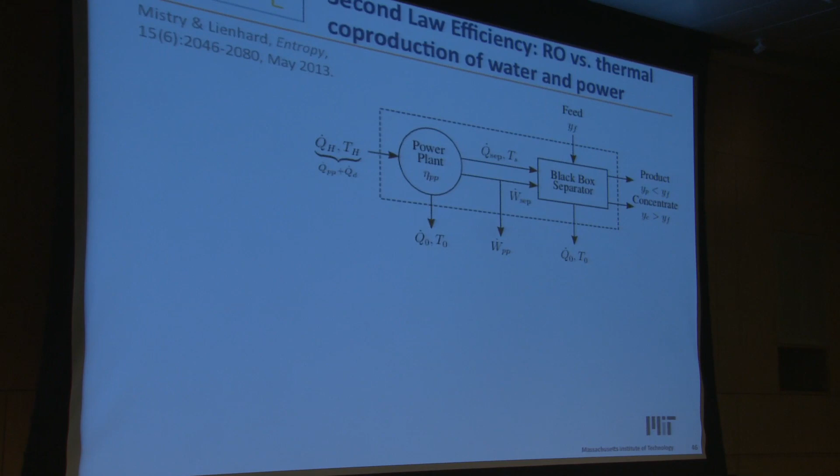The other thing you might wonder about as you think about this efficiency: I gave you efficiency numbers for energy going right into the plant, the electricity going into the reverse osmosis plant, or the heat going into the thermal desalination plant. But these things are also done as co-production, where you're taking primary energy, the coal you burn—well, let's hope you're not burning coal, the clean fuel you're burning in the power plant, natural gas, shall we say—

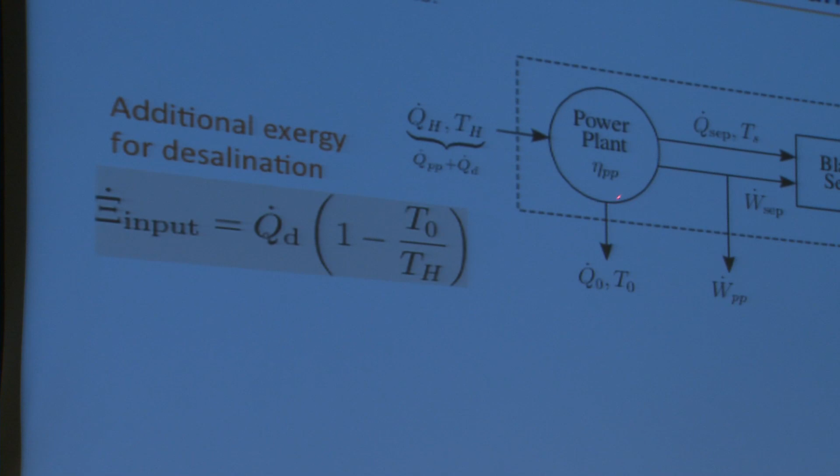and you're burning that, and using it to produce electricity and perhaps some steam blowdown. You could take the steam blowdown and drive the thermal desalination plant, or not have the thermal desalination plant, and use some of your electricity to make water. You have choices to make here. So we can think about this as follows: I have to put some additional amount of energy into this plant in order to drive the desalination plant. If all I wanted to do was make this much power, then I'd only need, say, Q power plant worth of power to go into my power plant. But if I want to take out some steam here, if I want to take out some power here, I'm going to have to put in a little more. So this is the added primary energy that you're putting into the process.

The question is whether a thermal plant might have an advantage here, because you're just taking so-called waste heat—I don't like that term—blowdown, if you like, from the power plant to drive the thermal process. You're going to have to blow down some steam no matter what.

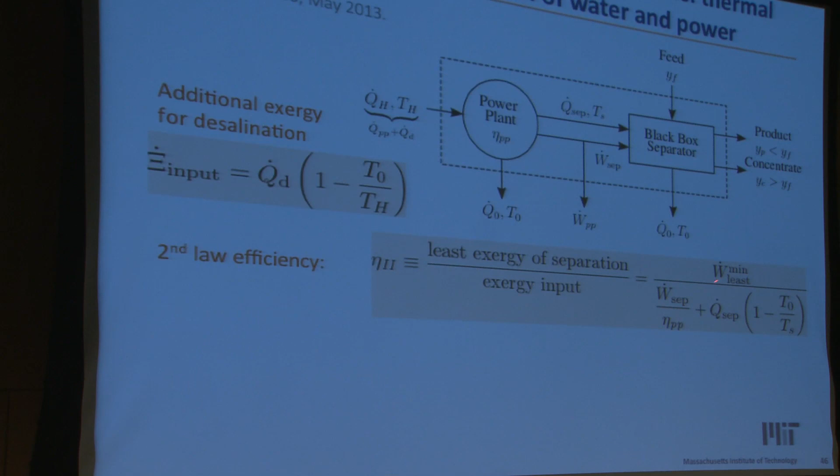So we could compute a second law efficiency here, as we did before, looking at the least work to separate fresh water from salt water, and then the exergy input to this plant. If I write out the numbers and do some calculations, you've got the work you put into the desalination plant divided by the efficiency of the power plant, or the heat you put in relative to some temperatures appropriate to the process.

So let's talk about alternatives. Desalination is what I've been interested in—seeing what you can do to lower the energy of desalination to make it a more efficient process. But there are other ways to get water. When you're looking for water for a municipality, desalination is one option among many, and it needs to be justified before you jump in and use it.

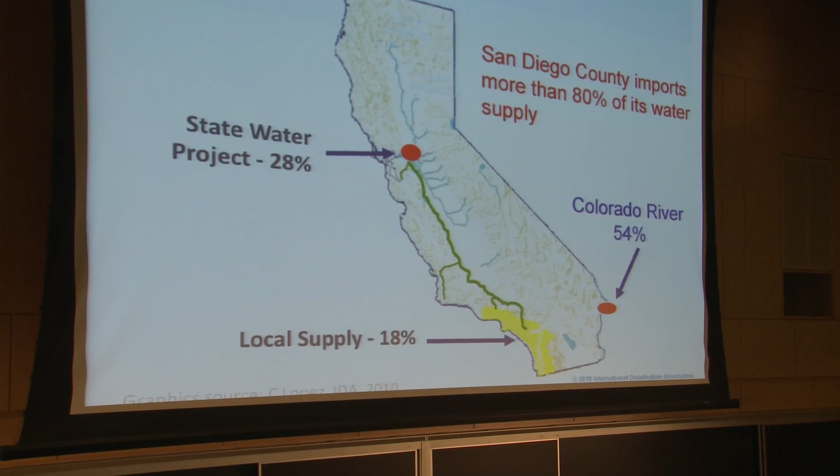San Diego, and for that matter Los Angeles just to the north, have the problem that they are very large cities in effectively desert regions. If you know Los Angeles and you know Wilshire Boulevard, it runs right through the middle of the city, just south of my alma mater, UCLA. Half the population of California lives south of Wilshire Boulevard, whereas about 80% of the water in California is up here. So it's clear they didn't design the state right.

Could have been designed differently. But they were able to do LA, if you like—LA was able to grow because it was able to find water from remote sources, the first of which was the Owens Valley. A famous story, if you read Cadillac Desert, or saw the movie Chinatown: they went up, posed as ranchers, bought up the water rights, and diverted the water.

Owens Lake is dried up. Nobody's paid for the environmental cost of making Owens Lake go away.

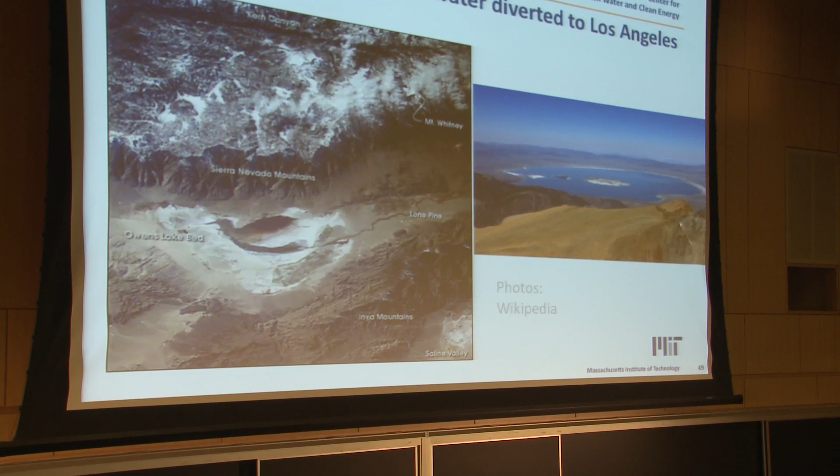Mono Lake was having similar problems—water was being diverted up there as well. Eventually, you can see this island here; the water got low enough that a land bridge formed out to the island. People who had been fighting to keep water in the lake had not succeeded under water rights rules. But as it happened, the island had some endangered species of birds that nested on it, and when the land bridge formed, coyotes were able to get out there and eat the birds' eggs, and maybe the birds. So they were able to get the water put back in the lake using the Endangered Species Act, and that was the solution to stop that water transfer.

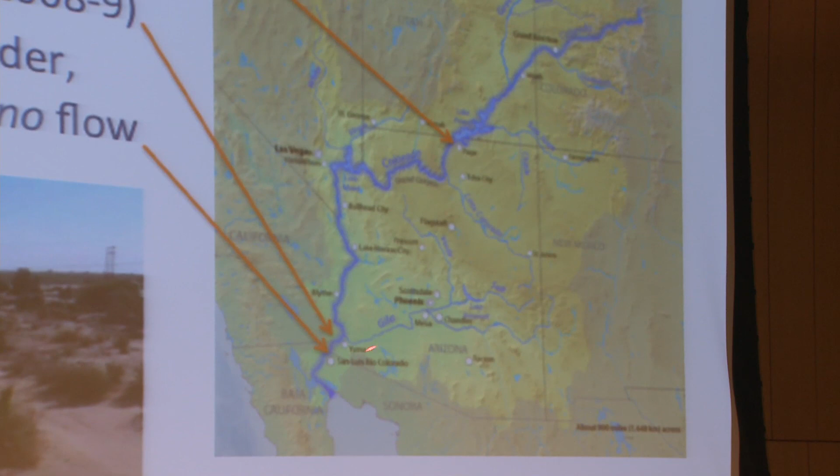Colorado River—everybody's got their hand into this river. Here's some numbers: the Glen Canyon Dam is here; the 100-year average flow at the Glen Canyon Dam is about 500 cubic meters of water per second. There are two borders with Mexico, the northern and southern, because of a jig-jag. At the northern international border, the average flow is about 10% of that amount. The rest has been taken out, mainly for cities, some for irrigation. At the southern border, in many years, no water at all flows into the Gulf of California.

That's an externality that's not accounted for when people look at the price of water and the impact of these transfers. But I'm talking about energy, so let me come back to energy.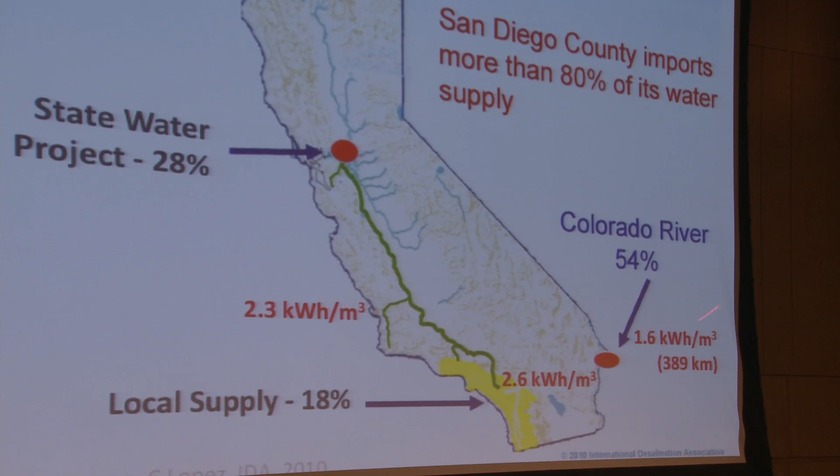These are the pumping, simply the conveyance energy for moving water in those aqueducts. Doesn't include any treatment, doesn't include high service pumping in the cities. The energy required to pump water from the Colorado River into San Diego and LA is about 1.6 kilowatt hours per cubic meter. The energy required to move it from Sacramento all the way down to Los Angeles and San Diego is 2.6 kilowatt hours per cubic meter, which is comparable to the energy required to do state-of-the-art reverse osmosis of seawater.

So immediately you can make the argument that reverse osmosis applied in Southern California would be carbon neutral or nearly carbon neutral relative to what's being done now. It would also be done without the environmental impacts on the Sacramento River and the Colorado River, etc. So there's more to the question than just energy. My point is that what was the state of the art and the best solution 100 years ago may not be the best solution today, and a reconsideration of alternatives may make sense.

Of course, the desalination plant is also drought tolerant, whereas the aqueducts, as we have seen, are not drought tolerant.

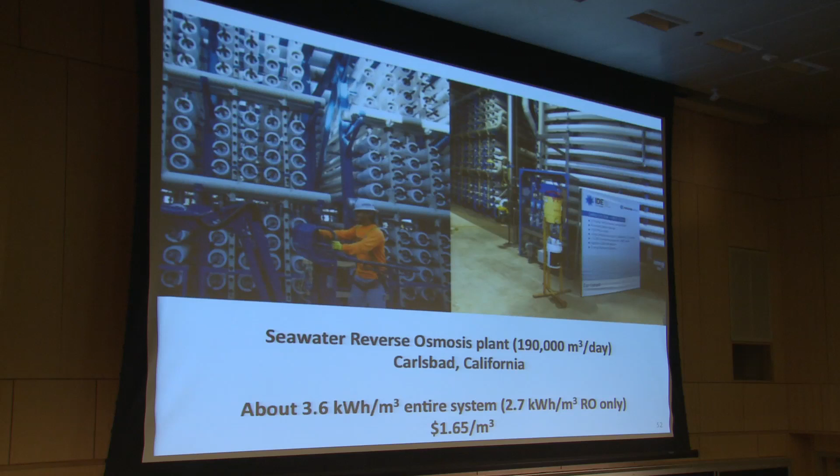San Diego has recently opened what is the Western Hemisphere's largest seawater desalination plant. It produces about 190,000 cubic meters per day of water, equivalent to say 7 to 10% of San Diego County's water demand. The energy requirements for the RO stage itself are about 2.7 kilowatt hours per cubic meter. There's additional energy for intake pumping, pretreatment, and pumping it another 10 miles to connect to the city's water main—there's a very long pipeline behind this plant. So all in, the energy is about 3.6 kilowatt hours per cubic meter for this plant.

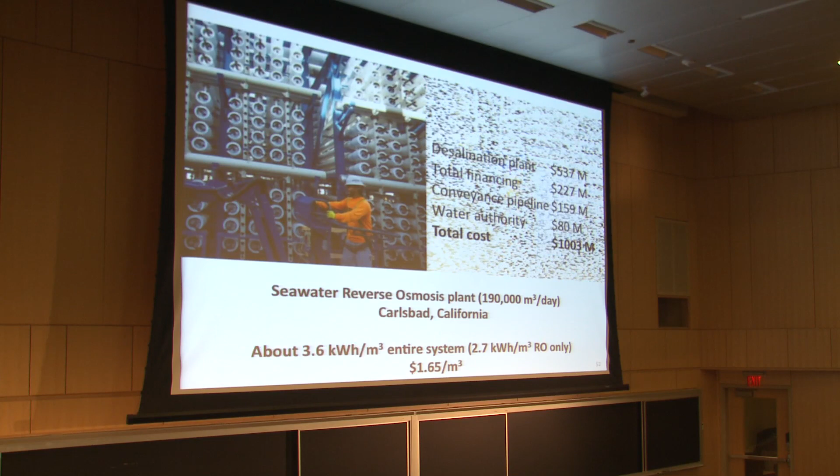Cost of water: they have a contract to sell this water to San Diego for $1.65 a cubic meter. So that's the contract price. What did this thing cost? Well, it cost about $540 million to build the desalination plant. It's a little higher than some of the EPC numbers I showed you before, but it's in the ballpark within the scope of projects around the world.

Financing costs, that is getting the loans and paying the debt service, are a huge part of the cost of this plant. This underlines the point that how you finance a big project like this makes a big difference to what people are going to pay for it.

The conveyance pipeline—think about this. You're on the coast of Southern California, in Carlsbad. This is a nice residential area with a lot of expensive houses. This pipeline snakes its way inland 10 kilometers, through a rather sinuous path, through some very expensive real estate. And it cost them $160 million to get the thing in.

That's one of the challenges anyone will face trying to do desalination in California. Coastal real estate there is very expensive. It's also very well protected—a lot of regulations around it, a lot of people interested in seeing that the marine ecosystems are preserved, that the surfers can surf, that there isn't a lot of ugliness along the beach. So they're working under a number of constraints in this case. The plant was about $1 billion.

Now I mentioned marine ecosystems, and I want to come back to this point. At Carlsbad, their plant is located right behind a power plant that's been on that site for about 50 years. The power plant takes in a lot of water for its condensers. Some fraction of that water is then taken into the desalination plant. It's a little bit warmer—it gains about 2°C going through the condensers, so it hits the plant at about 16°C. It then comes out of the plant with its salinity much higher and its temperature approximately the same, where it is then blended with about 100x the volume of condenser water and discharged to the same outlet the plant has been using for condenser water for some time. It relies on tidal mixing beyond that to diffuse and dilute.

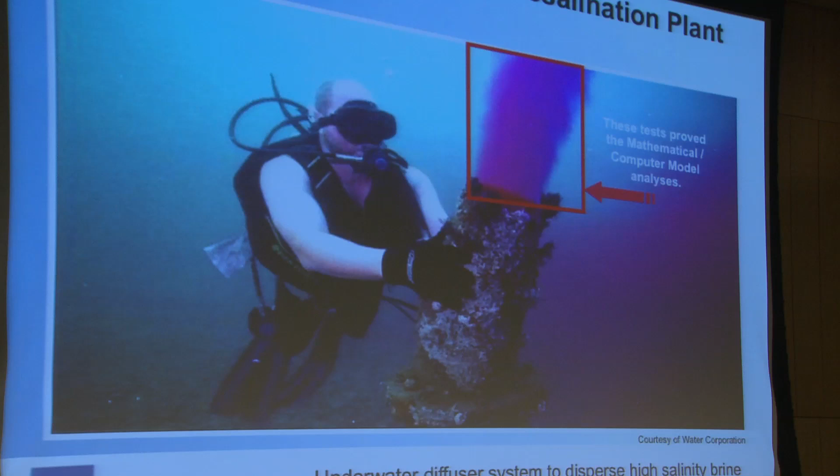This is a photograph from the plant in Perth, Australia. The Australians went very heavily into desalination about 10 years ago. They built 6 major plants.

Probably the most successful of them were the two plants they put up in Perth, a very dry area that has continued to use them steadily. The plants were built in an area with a sensitive marine ecosystem and a lot of environmental regulation to protect it. So they built an outfall pipeline that went a couple kilometers offshore, with a 6-acre site containing about 20 nozzles distributed at spacings of 20 meters or so.

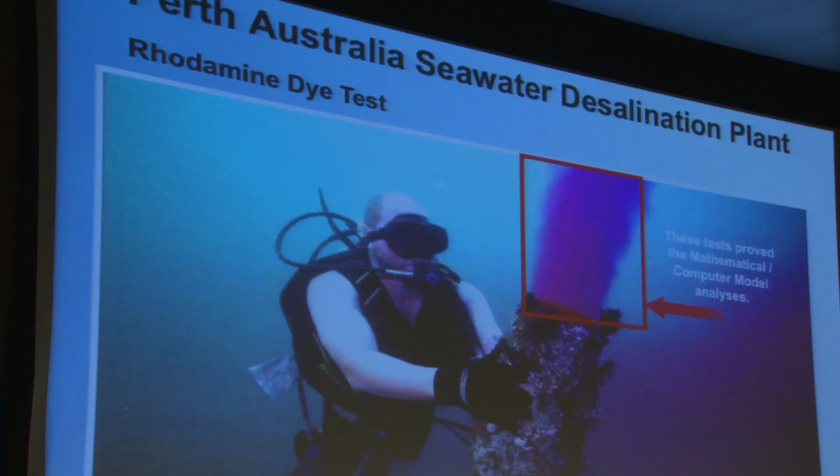Water is injected with some velocity, as you can see here. They rely on turbulent mixing to diffuse it and ensure the salinity decreases to within a couple parts per thousand of background within about 100 meters. The photograph here is one I got from the designer of the plant, a guy named Gary Crisp.

It shows the rhodamine dye tests they did. They simulated all this numerically to figure out how to place the diffusers, then they were required to go back and verify it. So they put rhodamine, a fluorescent tracer, into the water and made measurements to confirm they were getting the dilution required under the permits. This is an example of that case.

Gary likes to point out that you've got marine life on the diffuser, but I think that may be oversimplifying a little bit. What's in this water that comes out? Well, salts from the seawater. Depending on the plant, there could be some residual chlorine, which has a half-life of about 15 minutes in the ocean. Depending on the plant, corrosion byproducts could also include things like chromium. So there are issues to consider when you think about what you're putting back in the ocean.

What are the right concentrations and what's safe? At this point, what I've heard has been a lot of tug-of-war between people on both sides. I think it's an area where more research would go a long way toward finding good designs and solutions for these plants, and that's ongoing.

The other question is intake. When you pull water into one of these plants, you don't want to entrain marine life. So to first order, you put screens over the intake to keep big things out. But you've also got to keep the velocities down, because if intake velocities are too high, small fish get swept onto the screen, can't get themselves off, and die. So you have to think about that as a design variable too. There's a balance of how you design this, control costs, and manage these impacts.

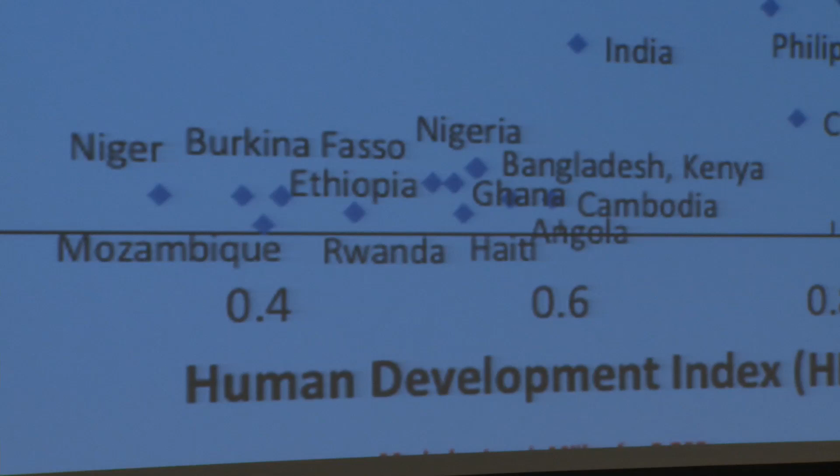This is a graph one of my students made showing water consumption per capita, based on UN data. I have a comment on that in a minute. It shows liters per person per day for various countries versus the Human Development Index, which is a measure of lifespan, literacy, GDP, and some other things lumped together.

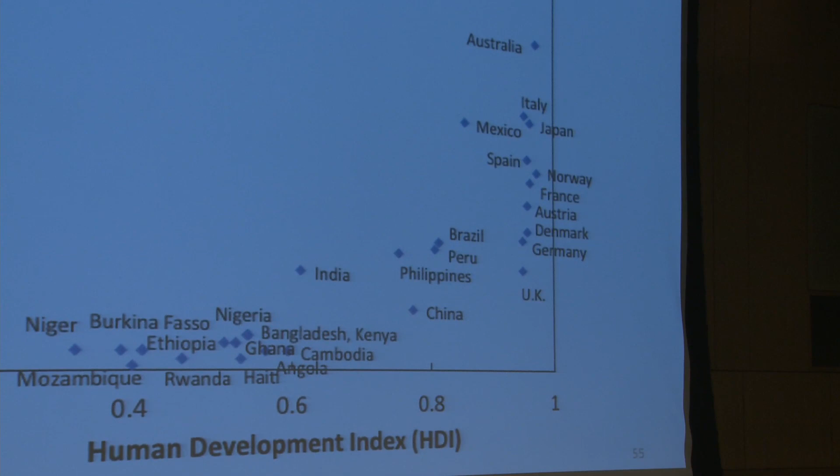You can see that in a number of countries where the Human Development Index is low, per capita water consumption is also low. You can also see that in countries where the Human Development Index is high, water consumption may or may not be high. It's a little difficult to draw a conclusion that there's correlation here, particularly at the higher end where the curve just seems to jump up. The reasons some countries are so high on the chart relative to others isn't obvious. Germany is a pretty advanced country. Even as my friend Andrew will tell you, the UK is an advanced country—sorry, Andrew—and the US, of course, is up here as well. So there's something going on here that doesn't have to do with necessary consumption for standards of living.

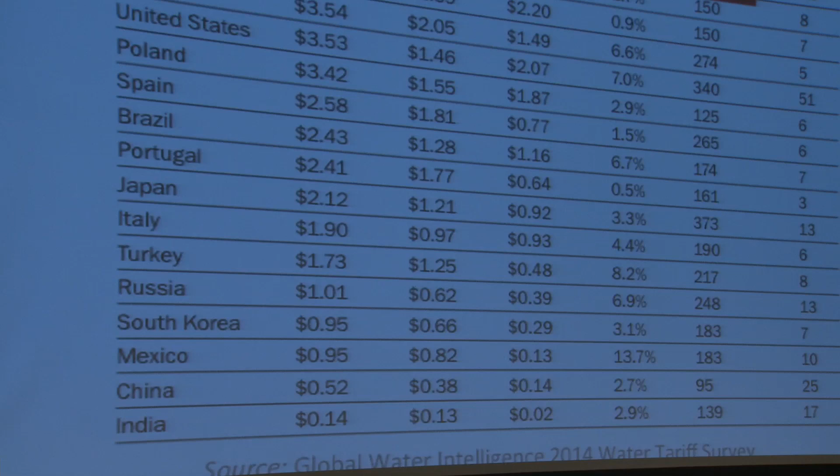Let me make a couple of comparisons. This is Australia and Germany. Price of water is about the same, but per capita consumption differs by more than a factor of 2. It doesn't seem that price, at least at this resolution, explains the difference in consumption.

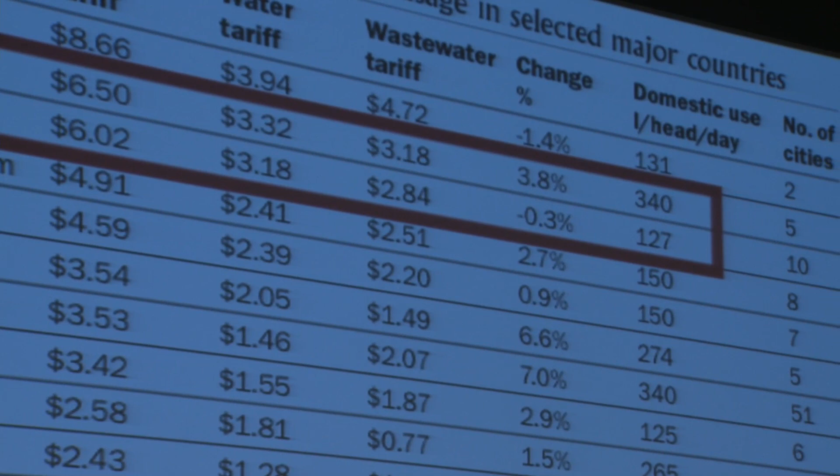You'll notice this number is lower than the one on the previous chart. Different data sets - the UN Human Development Report had numbers for US consumption that are much higher than what the USGS would tell you. So you have to look closely at the data and what's being reported and measured.

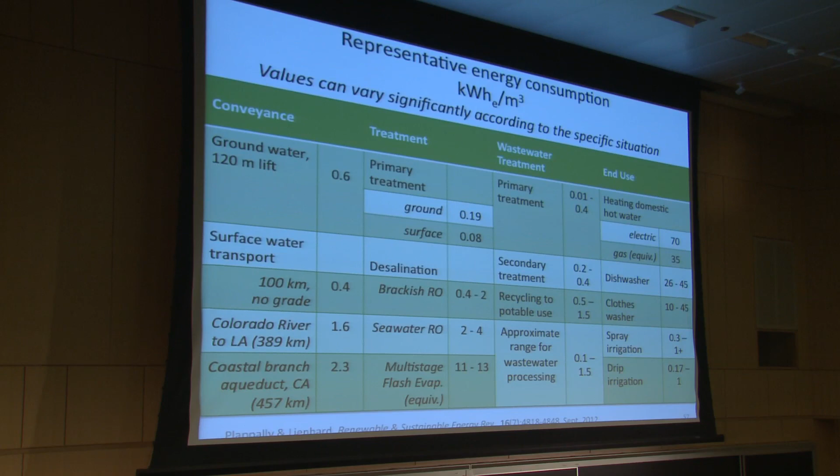These are energy consumption figures in kilowatt hours per cubic meter for typical things we do with water. For example, pumping groundwater up 120 meters is about 0.6 kilowatt hours. Pumping it 100 kilometers with no grade might be about 0.4. The two aqueducts I mentioned are here. Primary treatment of groundwater or surface water uses not much energy.

Desalination requires more energy depending on whether it's brackish or seawater - the thermal process is here. Primary and secondary treatment... and look at this, recycling to potable use. That's interesting. The energy required to recycle water to potable condition is significantly less than to desalinate, or to transfer water over great distances. Of course, the most energy intensive thing we do with water is heat it.

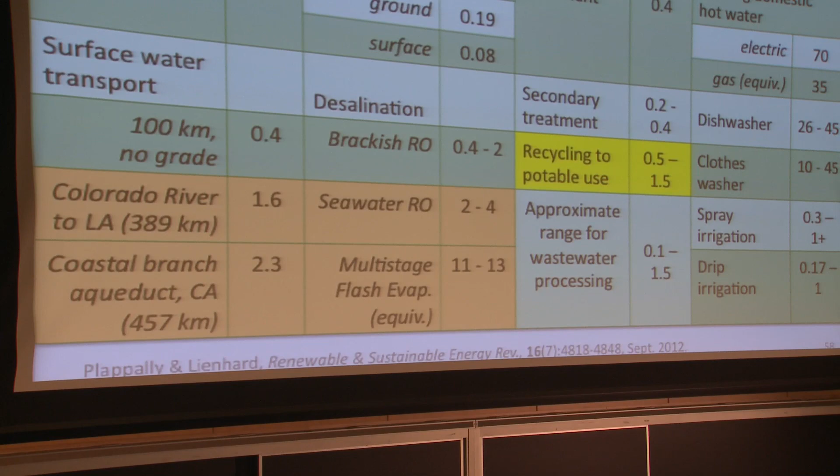If you want to save energy, save your hot water. But the recycling idea is, I think, very important as well, because that's water you've got on hand. Reclamation is common, but recycling to potable use may be less common. However, it's done in Singapore at large scale.

The energy numbers I got from their public utility, PUB, are 0.6 to 0.7 kilowatt hours per cubic meter, far less than seawater reverse osmosis. Singapore uses seawater RO as well because it can't get enough recycled water to meet its demand, but at present they're meeting about 30% of their supply through these means.

The process involves standard wastewater treatment, then an RO stage, then finally ultraviolet to break up whatever organics got past the membranes. Then it's basically ready to go. They don't call it wastewater - it's used water. Think about perceptions: we just used it, now we're done using it, we've treated it, we have new water. They've worked hard at public acceptance of the technology.

In the US, there are a number of projects along this line. A number came up in Texas during the drought. San Diego has commissioned a much larger water recycling plant than that desal plant I showed you. Orange County has been doing this for a number of years.